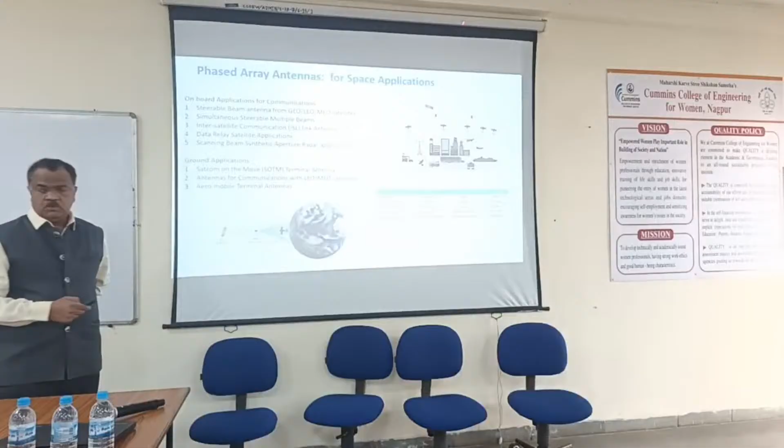Now the phase array antenna for space application, if you see, there are different domains, I just split into two. One is for the onboard application - when I say onboard, it means the antennas which are flying on the spacecraft satellites. And the other is the ground application, though it may be communicating with the satellite. One is for space-borne applications, that is an onboard application for communication - not necessarily communication, it can be navigation or remote sensing satellite also. The ground application is the one which is communicating with the various spacecraft.

Now, one of the antenna requirements is a steerable beam antenna from LEO and MEO satellites. What happens then, why do we need this kind of feature, having the steerability, having the reconfigurability?

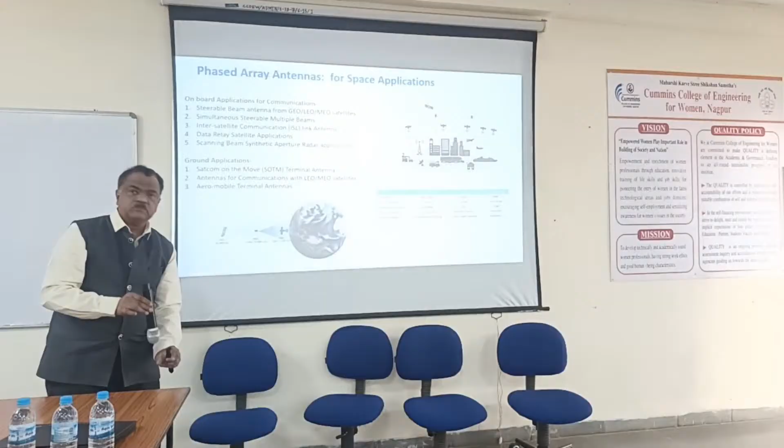If you see over the Earth, there are various kinds of orbital satellites. One is LEO, which is flying at a height of around 500 to 1200 kilometers. And if you see, their coverage is very small - just assume that suppose I have a torch, and I'm making its beam, the light, the field of view of the torch. You assume it is an antenna beam. If you put the torch like this, what will happen? If you put it very near to the ground, you will find a small circle. The moment you go up and up, the field of view increases. A similar thing happens here.

Similar thing happens with a satellite in the lower orbit, which has an altitude of 500 to 1200 kilometers - its coverage is small compared to the entire Earth. The moment you go to the medium Earth orbit satellite, which is 5,000 to 20,000 kilometers, its coverage is more. If you want to cover the entire globe with these satellites, you will be needing hundreds of satellites. With just a few tens of satellites, if we go with the geostationary Earth orbit, which is at the height of 36,000 kilometers from the Earth's surface, 3 satellites are enough to cover the entire globe.

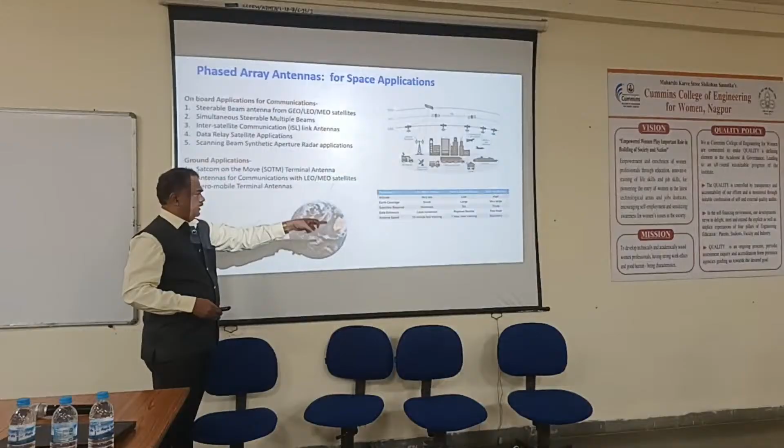Not only that, if we put 3 satellites at 120 degrees apart, they will cover the entire globe. Now their coverage is big - though the subtended angle is small, the coverage is big. So based on that, we see the various scenarios where we need this kind of phased array technology.

Now the question comes, where do we need this antenna?

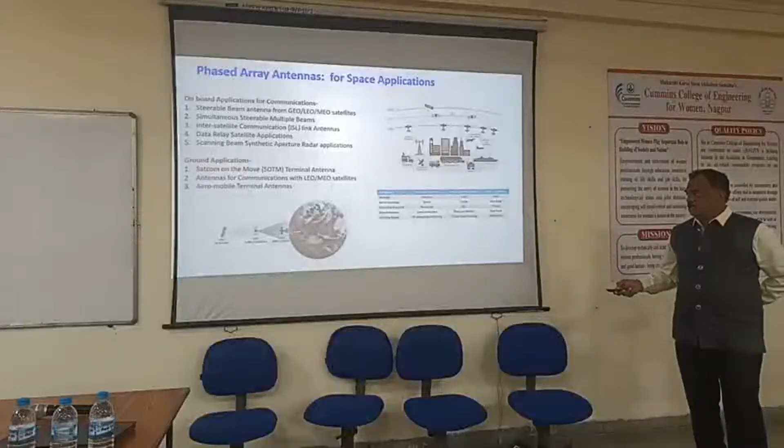Similarly for LEO and MEO, especially LEO, you might have heard of Starlink or OneWeb or other satellite constellations. Recently the Government of India gave permission to use the Starlink satellite constellation. They have an orbital period of 90 minutes to complete the globe, so they are very fast. Even for one satellite, the visibility from the ground will be only 10 to 15 minutes, so within that time the next satellite will come.

So you need very fast steerability of the satellite as well as the ground station antenna. For that you need steerable antennas, either for the ground antenna to track the LEO or MEO satellite, similarly for MEO as well.

Now similarly, there's the application of simultaneous steerable multiple beam generation. If I have spot beams, very high gain beams, and I have to cover a larger area, then I need simultaneous generation of multiple beams from either LEO or GEO. There also I need a steerable antenna, a phase array antenna.

Similarly, inter-satellite link communication, various LEO to MEO or LEO to GEO communication, shown here in different orbits. Suppose LEO is communicating and going within 10-15 minutes of the circle, then if there's already a call going on, there should not be call breakage. So it has to transfer the content to the GEO, and GEO to the next LEO coming into picture. There you need inter-satellite communication, satellite to satellite communication, and there also you need a steerable or phase array antenna.

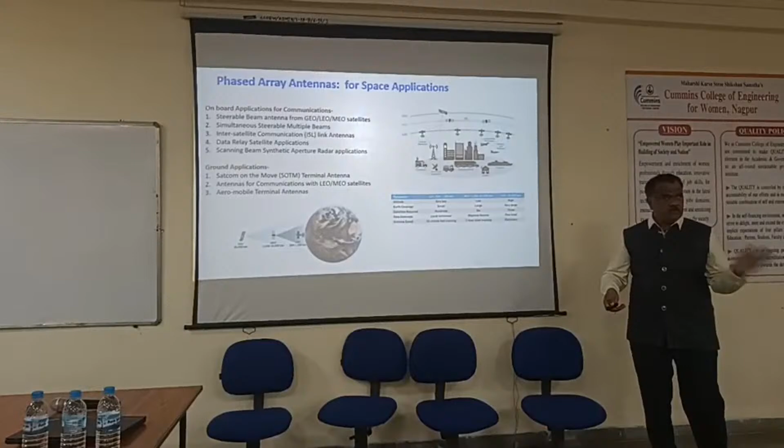Now again in the data relay application, the right example is our Gaganyaan, which is also moving in LEO constellation around 400 kilometers. For Gaganyaan to be continuously tracked and communicated with, we have put in satellites, currently two, called Indian Data Relay Satellites. Gaganyaan will communicate with the data relay satellite, because Gaganyaan will not always be visible from Indian soil, since it completes its orbit in just 90 minutes. It becomes very difficult to have visibility of a satellite going beyond the horizon, but the communication should not break.

So then it communicates via LEO to GEO, since GEO is always visible, and it communicates to the ground station. For that application also, we need a steerable or phase array antenna.

Then there's the scanning beam synthetic aperture radar antenna. This is one of the remote sensing satellites, a radar imaging satellite, mostly in LEO. We have to scan and take images, and especially in microwave remote sensing, we need a scanning beam antenna.

So these are the various applications where we essentially need phase array antennas or steerable beam antennas. Rather than saying exactly phase array, I will say steerable beam.

Now, how do you achieve the steerable beam antenna? There are various technologies available that will classify into different types of antennas.

Similarly, here I mentioned the SATCOM on the move. Even if you are communicating with the geo satellite, which is stable with respect to Earth's movement, if you are moving on a vehicle, say a train, car, or plane, then your azimuth and elevation angle to track the satellite changes, and you need continuously steerable tracking to the satellite. That is one of the best observed applications. For SATCOM on the move, phase array is essentially required.

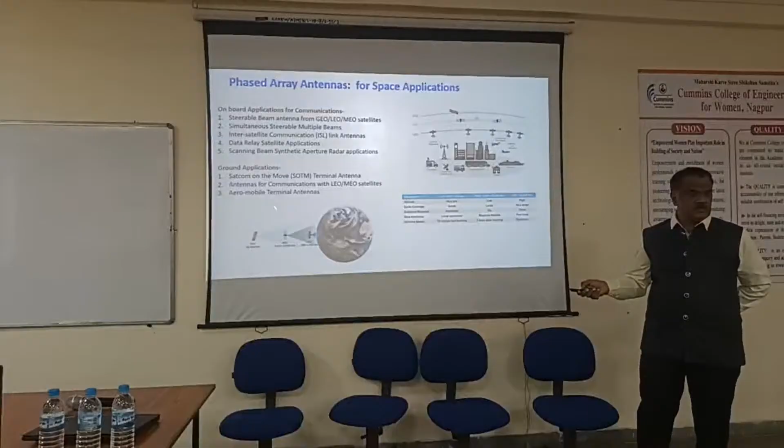Similarly, for LEO and MEO, as I mentioned earlier, it is essentially required because the satellite is moving fast. Aeromobile applications also, nowadays various aircraft are providing internet during flight, and they essentially need a phase array because they have to track mostly the geo satellite.

Can you go to the next page? Now we'll come to the topic of what is the phase array antenna. The phase array antenna per se is nothing different. It is not a tough concept, it's a very simple concept. It's a progressive phase at the input of the radiating elements.

I will show in the next slide. If these are the array elements, different array elements are there, and you have this kind of phase front, then the beam will come from there. If you change the phase front in a different direction, the beam will come from the direction perpendicular to that phase front. The concept is very simple.

Only thing is how you realize it, that's what makes the different technologies. There are various challenging technologies available to realize this. Simple concepts are also there, difficult concepts are also there.

So these are the progressive phase, that is the linear phase taper along the array of elements, that will generate your beam squint. You change the linear phase taper, you will get the beam squint.

So these are the, again, why phase arrays. The question becomes why phase array, because what happens when you can do it by mechanical steering also. When there is a large antenna size, what happens is the response time increases. For example, various radars on the ground, if you move by mechanical movement to track an incoming missile or anything, it becomes very difficult to cope up with the speed of the missile or the target. So essentially, what we need is electronic steering.

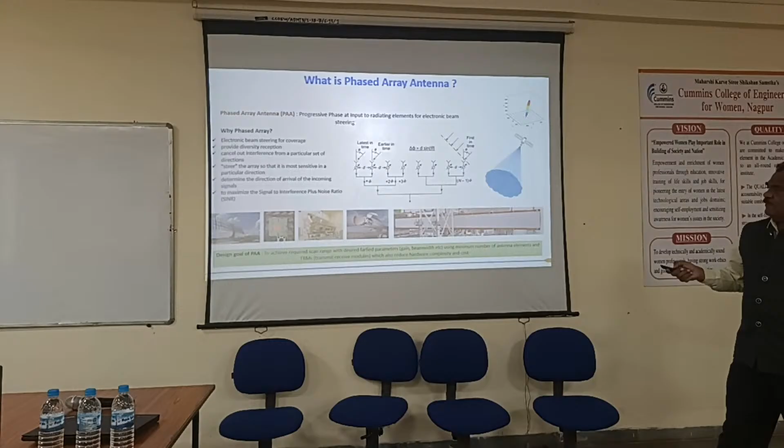In doing the earlier phase array, if you wanted to build a complete phase array, it used to require a completely big giant room. Not only room, it required a lot of volume because there was no miniaturization in the active circuits. Those were the days when phase array was a beyond-reach technology.

But nowadays, as we'll see in the course of the lecture, you can make one very easily in your college, sitting on your palmtop. So these are the advantages, and another advantage: it's not only diversity reception. Having the phase array gives you different control over the aperture.

You can realize what happens during different communication scenarios nowadays. There are various fixed frequency signals, various applications going on. If in a particular direction you are getting any interference, you can create a null in that direction so that it is not affecting your communication. Your communication direction can still link and work, and the interfering signal you can suppress by creating a null or suppressing the side lobe in that direction.

That's a big advantage of the phased array. It's not only steering, but along with steering you can create interference suppression in your beam pattern.

This is the steering of the beam, that is the standard application. Determine the direction of arrival - what happens many times is you don't know where to steer the beam, where the target is coming from, where the object is, so I have to steer the beam. The advantage of this phase array is that you have so much flexibility.

You can scan the region and determine your signal's direction of arrival. There are various methods for doing this direction of arrival estimation - you might have studied it, or perhaps taught it in your various courses. Various algorithms are available to detect from where the target is coming.

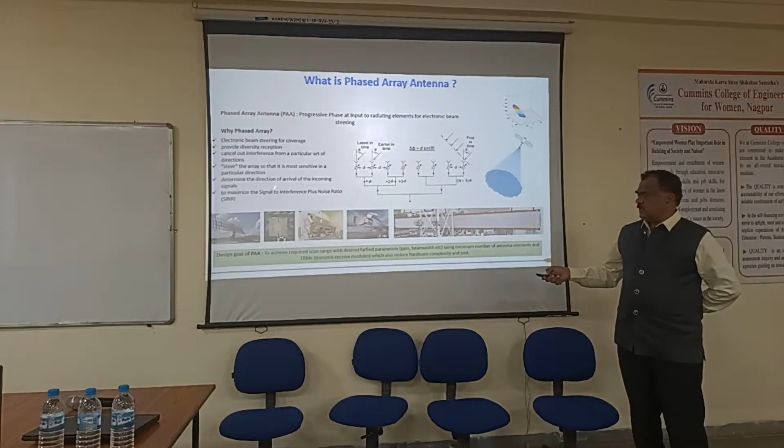This is another very important application need. This cannot be done mechanically only, so it has to have an electronically steered beam antenna, so that you can maximize the signal to interference plus noise ratio. This is again a manifestation of the same application.

Now, what is the design when we talk about phased arrays? What are the design goals? What is essentially required to consider when designing it? What is the scan range I'm looking for? How much - 0 to 60, 0 to 90, 0 to 10, 0 to 5? That depends - that's the first parameter you should have. What is the scan range?

Then, what kind of far field patterns are you looking for in terms of gain and beam width? If you need really high gain, that will be your starting goal and starting parameter for designing this. Then, use the minimum number of elements, because the more the number of elements increases, the more hardware and cost increases, and the entire thing becomes very complex. So those are the design goals for the starting point, and then accordingly the design proceeds.

Now this physics of basic beam steering - as I mentioned earlier, if we focus on this part, it is very simple. Let's take the case of the linear phased array. You can have uniform amplitude. Now you only have to change the phase taper.

This is the phase taper I am showing across this element, and this is the pattern I am showing across this element array. What happens is, the moment I change the beam - let's say from this direction it is steering - because the moment it shifts, the beam goes in a different direction. It's a simple concept: you change the phase taper, and you get the beam direction change. This is the simple principle on which the beam steering concept is based.

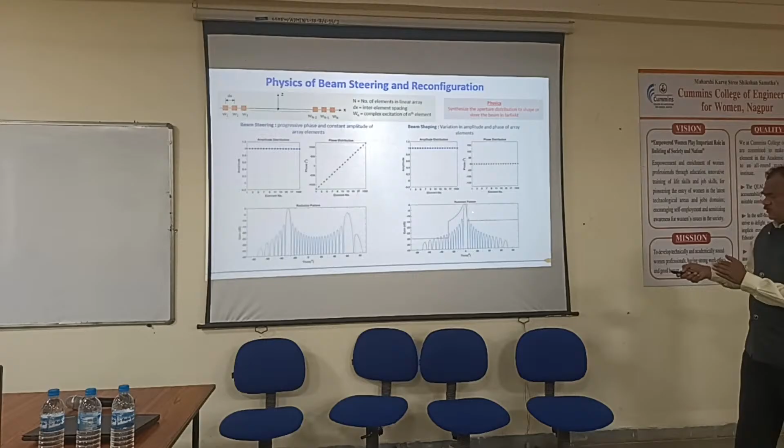Now if you see at this particular position, this pattern has become exactly like this - in the other plane it is simply a pencil beam. Now if somebody asks what is synthesized, how you synthesize it in simple terms - the antenna's far field is nothing but the Fourier transform of the aperture field distribution on the antenna.

If I want to arrive at this kind of final excitation coefficient in terms of amplitude and phase, I take this kind of far field pattern and take the inverse Fourier transform - then I should get the excitation coefficient close to this. Though it won't be exact, it will be a good starting point for the design, to get the initial excitation coefficient, and then you need further optimization.

The reason optimization is needed - why the inverse Fourier transform doesn't result in the exact pattern - is because of truncation of your aperture. As you see in the Fourier transform, infinite bands are there; if you truncate, the performance will change. Similarly here, you are truncating the size - your antenna aperture is not infinite, it has some finite dimension. So according to that, your exact inverse Fourier transform will not yield the desired result.

You need essentially optimization in both amplitude and phase to get this desired pattern. These are just a few examples I showed. There are various things you can do, like creating a null in a particular direction. For example, if you want further separation from a particular direction, you change not only the phase but also play with the amplitude, and you can create a null in that direction. So various types of radiation patterns can be generated.

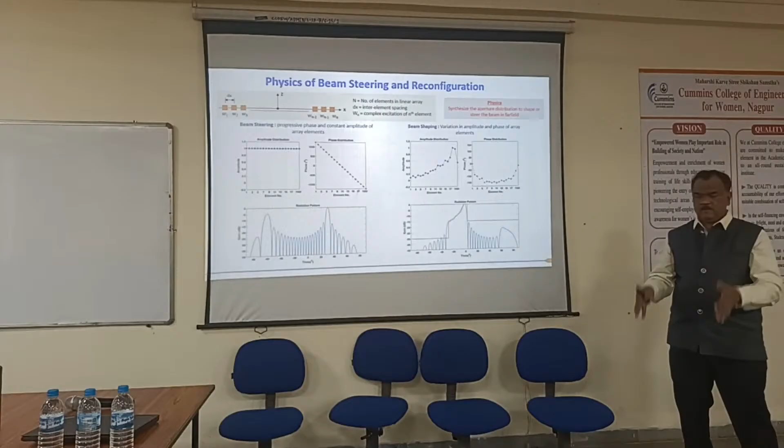For example, for our geostationary satellite, we had to generate a footprint literally like our geographical boundary, like India. There we used a shaped reflector because it was a fixed beam, but again the synthesis is a similar concept. The optimization is complex, but you get a footprint exactly fitting your geographical boundary. The power is not going beyond India; it's exactly concentrated only on our mainland region and islands.

Now, if we go to the phased array, what are the different types of phased array architecture? You can have passive, active, or hybrid. What do I mean by passive? As I mentioned, if it's a simple concept where I only want to steer the beam, I need essentially only the phase shifter, nothing else.

If I go with a passive array for the scanning beam, then I can use passive phase shifters. These passive phase shifters can be ferrite phase shifters, or various reflection type phase shifters. There are various ways of achieving these passive phase shifters.

Then what you need is to combine the power. You need essentially a beam forming network, like various power combiners depending on the number of elements, and once you combine them, you get a beam in a particular direction. Now, for radar, whether transmit or receive, you use a single transmit-receive module, and then subsequently the IF domain, receiver, or signal processor. This is the constant part.

But in the passive array, this will be the only element. The major part will be the phase shifter, which will steer the beam. What is essentially required is a high power amplifier or this...

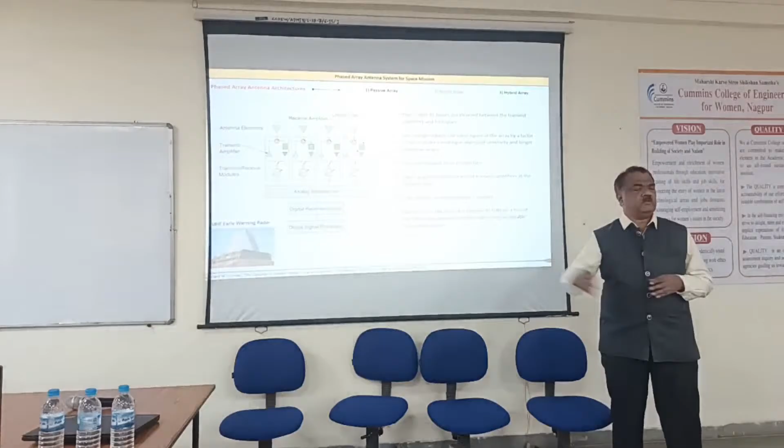Here, now the transmit amplifier, since it is 100, I don't need a 100 watt single, I will need a 1 watt amplifier as 100 numbers. Similarly, LNA will be 100 numbers.

The advantage I got, the phase shifter will anyhow be the same. The advantage is, if some of the elements fail, the entire array will not fail. It will be a graceful degradation. A 5 to 10% degradation if the elements fail of these active devices, the performance will have insignificant degradation. So you can still tolerate it and still communicate.

This is the major advantage, the graceful degradation of the whole phase array. Because the contribution of each is say 1 watt or 2 watt, even if 10 out of 100 one-watt amplifiers fail, it doesn't matter because you are hardly losing 10 watt power, but the remaining 90 is still available. So the entire phase array performance degradation is graceful.

This is very important, especially onboard, because there we cannot replace it. Once we have flown the satellite and it fails, one amplifier fails, then we cannot go and repair it. On ground we can do it, but onboard we cannot. So this is a very important parameter.

The graceful degradation is a very important trade-off while selecting the architecture, because the temperature it's exposed to can go from -60 to +70 or something. That kind of temperature range applies to the active devices, and despite passing stringent qualification criteria, there may be a workmanship error or a device error, and it may fail. So we have to have a tolerance to performance failure. This is why graceful degradation is a major advantage here.

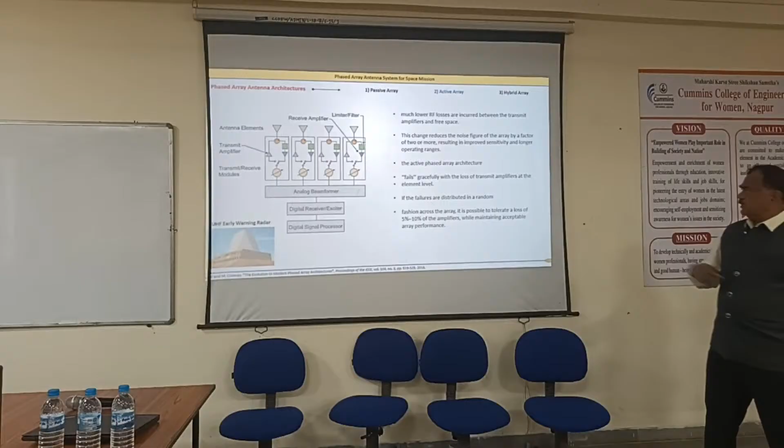So these are the different advantages and disadvantages of the different architectures. As I mentioned, earlier the active array antenna was very costly. Nowadays, because of the progress in 5G, 6G and mobile applications, since production is in the millions, the cost of various MMICs has reduced significantly, and the cost has reduced even for the active phase array.

Now the key parameters for specifying the active array: operating frequency and bandwidth, EIRP (effective radiated power), scan coverage, beam rate, side lobe levels, tracking accuracy, waveform parameters such as whether it's pulsed, duty cycle, and noise figure. These various parameters, some not necessarily specific to the antenna, are essentially part of the array because of the active devices - things like third order intercept, stability and phase noise, harmonic and spurious content, reliability, and prime power requirements. These are the various parameters you have to consider when designing the phase array.

Now, I probably will not go into detail since you might have studied antennas or taught this to your students - these are the basic array factors. When you have different elements in an M by N array with isotropic radiators, the array factor is the summation of all the individual fields. You get a very narrow beam, which we call the array factor, multiplied by the single element pattern if it is not isotropic and has some gain. If you multiply the single element gain with the array factor of the combined array, you get the entire radiation pattern of the full array. That is given in this equation.

Now I have shown another input. Many times I need a large gain. So if I go with individual elements, as shown earlier, and go for the TR module for each, my cost will be tremendous, enormous. That is okay when I trade off this.

If I really need a large scan angle, 45, 60 degrees or more, then I will go for individual elements with either active or TR modules each. But if I don't require that much large scan angle, then I will group some of the elements. But I still need a large gain, so to reduce the number and cost, I have to group elements.

Let's say I have done the grouping of elements, this much of a large array. If I use individual elements, it would need a large number of active modules, which I don't want. Let's say my scan angle is very small, less than 10 degrees. In case of GEO, that is good enough.

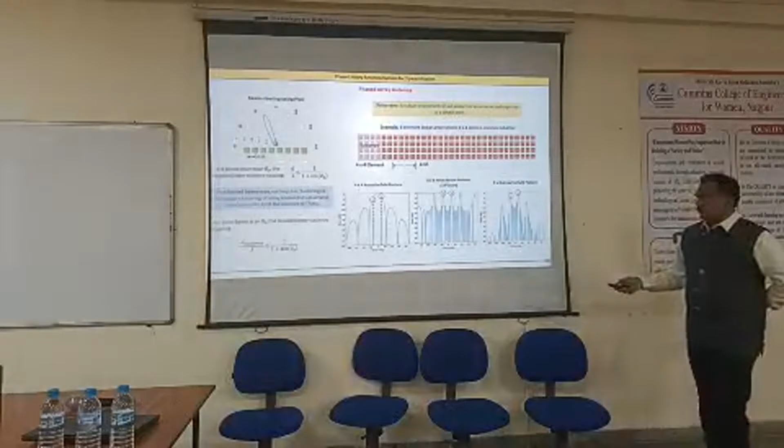So if this is taken, then the simple concept for having a grating lobe is: if D by lambda is less than 1 upon 1 plus sine of theta naught, your scan angle, then you can avoid the grating lobe. Now I will show what this kind of grating lobe looks like.

This is, let's say, a 4 by 4 array full pattern shown here in the normal case. But if I take the scan angle case, grating lobes appear, like here where I have scanned the beam using the subarray. Equal to the main lobe, there is another lobe called a grating lobe, which is also taking a significant amount of power. This is the disadvantage of having a subarray.

But if you are able to tolerate it, then I will not move beyond this much scan angle, I will keep a smaller scan angle because that was the requirement itself. Then I can tolerate this side lobe, this side lobe - this is called a grating lobe, and it will be governed by this criteria.

For subarray design, instead of single element spacing, you use subarray distance center to center. Then accordingly you select, for a given subarray distance, what is the maximum sin theta naught scan angle you can tolerate. This will reduce the grating lobe level, because grating lobes take a significant amount of power in the undesired direction, so by design you have to suppress it. This is essentially a tradeoff with reducing the number of elements, tolerable grating lobe level, governed by the scan angle.

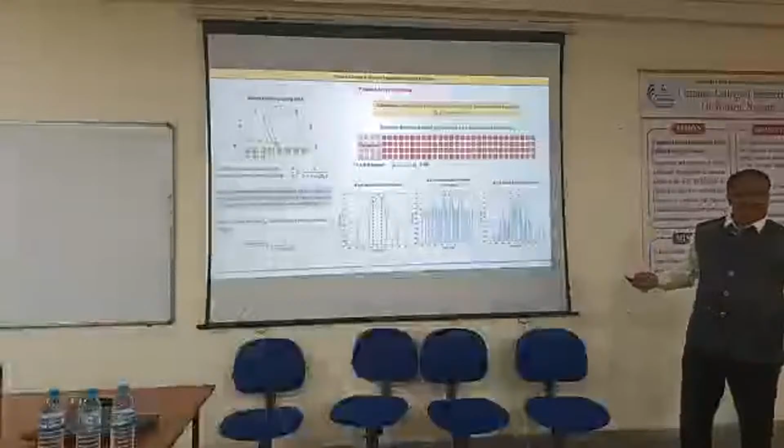Another parameter to consider while choosing the subarray is phase quantization. Let me go back to the previous slide.

Had it been a single element, each having its own phase shifter, I would have got the phase taper as shown in the earlier slide, giving a very good, nicely linear single line fitting y equal to mx. But what happens if I make a subarray? For this four element subarray, I get a constant phase, and again there will be a jump for the next four element array. This is the concept being shown here: when quantization comes for a subarray, say of four elements, there will be constant phase, then another constant phase for the next group, creating this kind of step.

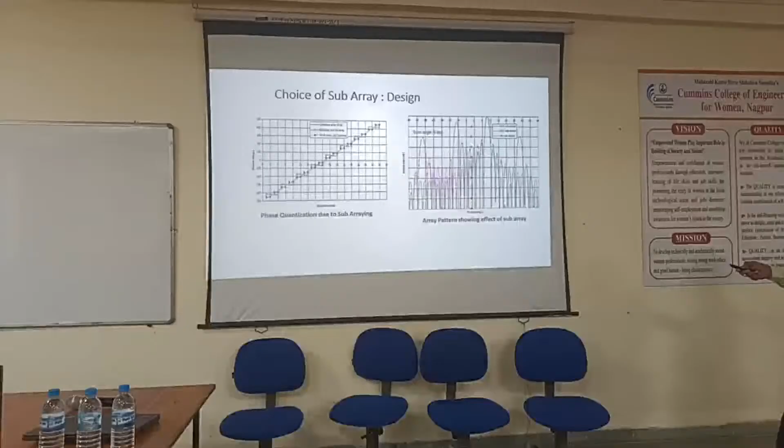This step performance appears on the aperture phase distribution, instead of the ideal spatial straight line you would have wanted. This staircase phase distribution generates quantization noise, which will also be seen in your radiation pattern. So you have to see how much of this you can tolerate, and again the tradeoff parameters are the same. Considering what is tolerable, you select accordingly and proceed with the design. These are the aspects you have to keep in mind while designing.

Another design consideration for phased arrays: suppose you take an odd number like 1:9, that's 9 elements. What happens when designing odd number power dividers? It becomes slightly tricky. That's why you choose a symmetric binary feeding network for the subarray to minimize dispersion. So if you have a good 1 to 2, 1 to 4, in the order of 2 raised to m, that becomes straightforward and easily good performance can be achieved.

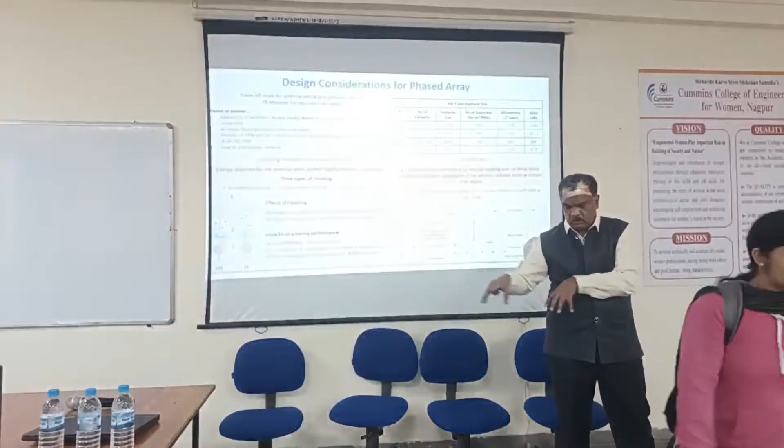So accordingly, the elements can be chosen. For modularization in the types, given the full array and subarray structure, I should select such that I can place things properly while modularizing, and accordingly select their power distribution. This aspect has to be kept in mind while designing the phased array. These are all practical concepts which are very important when you start designing the phased array and develop it, especially if someone asks you to.

Another important consideration is the choice of element spacing between elements. I showed the distance and how element to element spacing has an effect. The parameter it affects is the coupling between array elements.

The moment you scan the beam, what happens to the radiation pattern is radiative coupling between elements, and even surface currents, if present, cause mutual coupling. There are types of this coupling: it can be radiative, surface level, or feed network level. Surface level means if it's a patch array and you are scanning it, then along the dielectric substrate the feed is also going, causing surface level coupling. Feed network to network coupling, if present even in the feeding network, also causes performance degradation.

To what extent the performance can degrade, I am showing here. This phenomenon is called scan blindness.

If you have to scan a large scan angle, what happens? Let's say the dotted pattern shows the element pattern. If this element pattern behaves smoothly like a Gaussian beam with this kind of extent, there's no problem. But if coupling is the troubling parameter and is not properly designed or taken care of, this element pattern will not remain like this in the presence of other elements. Instead, it will create a null.

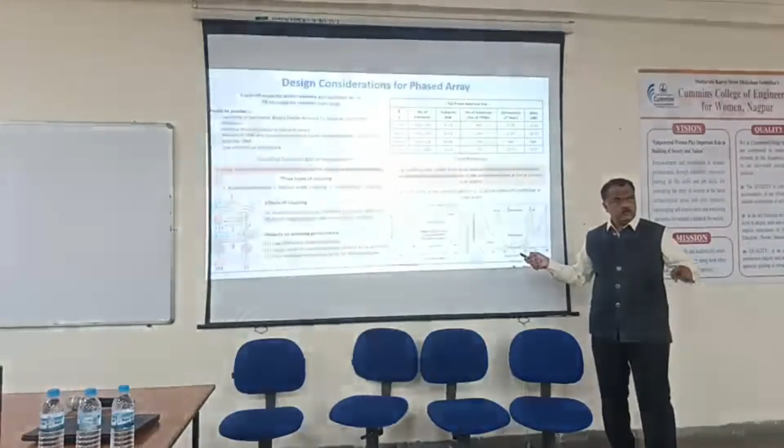Sir, can this analysis be done in specific software? Yes, this we can very well do in any full wave solver, either CST or HFSS, or various software which can handle 3D FEM or full wave solving methods. Any software, it can be HFSS, CST, or any specific software, and I can tell whether it has this capability or not.

There are many softwares that can take care of it, but you have to define and take care of it while designing. If you put an entire large array, sometimes you may find that your computational capacity is not large enough to solve the problem. This indeed will happen, so those things have to be taken care of.

If this happens, it's not only low efficiency—even if the problem is not that serious in extent, the efficiency will still be lower. That is another disadvantage if the coupling is poor. So mutual coupling in the phased array is one of the parameters that has to be seriously addressed while designing it.

Scan parameters are explained, along with the poor envelope correlation for MIMO systems. Again, a similar correlation factor arises when you have multiple elements, like in terrestrial communication where MIMO systems are used—this will have poor envelope correlation factor. These are the various problems we have to address while designing it.

Here I have shown some different types of lattice structures. It can be a rectangular lattice structure—how for different beams it will look while scanning, what are the number of elements, what are the scan losses. Sometimes even if it is a circular structure, you only select the circular aperture, but the lattice is still rectangular.

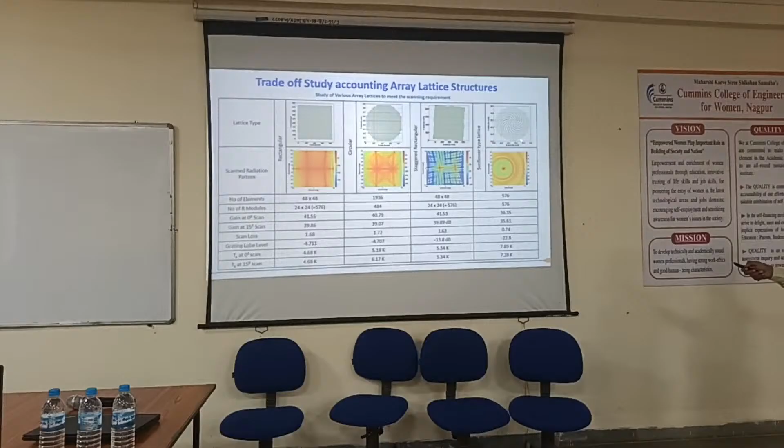This is a completely sparse array, or it is called an aperiodic array. The example I showed is the sunflower type of lattice—it is not regular, but at least has a regular structure, and it reduces the number of elements and cost. This kind of technology, not just the sunflower lattice but the aperiodic array, is becoming a topic of research—how to optimize it further using various methods, either AI or polynomial equations, to design and get the best performance over the entire scan range.

So this trade-off essentially has to be done a priori when you start designing your actual phased array. Can you go to the next slide, please?

Design considerations for phase shifters: there are various different types, analog or digital phase shifters. It can be either a continuous phase shifter or a discrete phase shifter. Various domains are available for this, either MEMS-based or MMIC-based phase shifters.

I think somebody has taken up the MMIC-based topic. Whether this topic has been covered by somebody? No, MMIC is taken by Asmita Rani.

Nowadays phase shifters are also realized as MMIC-based phase shifters using active devices. These can be very miniaturized structures, and if passive, it can be completely a ferrite or a diode-based device, or other possibilities also exist.

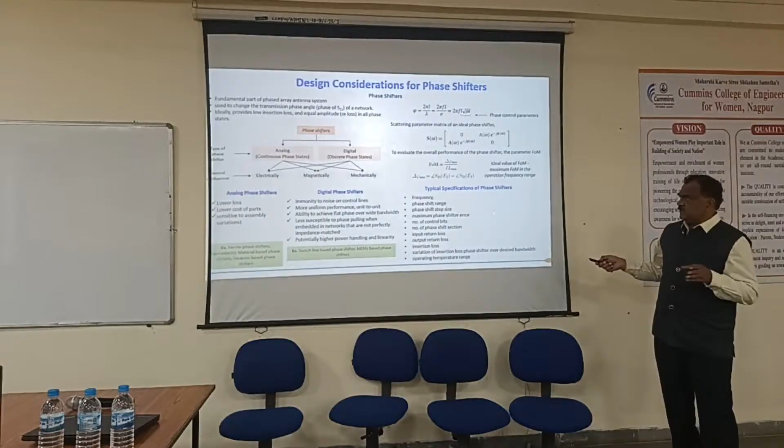That is the minimum phase shift you can achieve from the phase shifter, and this also introduces a quantization effect. Even with a single element, if you use, say, a 2-bit phase shifter, what quantization comes? 90 degrees—every 90 degrees, or only every 180 degrees it will give. So quantization is introduced not only by the sub-array but also by the type of phase shifter you use.

This effect we have already studied. This quantization affects not only the amplitude but also causes some beam pointing error. It's not as simple as it seems—it also causes dithering or wavering of the beam pointing. If the beam is really large and you need accuracy of 0.01 or 0.02 degrees, it matters a lot while designing and must be taken into account.

Here I have shown the various effects of quantization on the patterns. Ideally, if the beam is scanned from here to here, I should have gotten only these side lobes, since I've plotted the intensity. Ideally, I should have gotten this kind of three-dimensional pattern plotted in a two-dimensional UV plane.

But if we go back to the 2-bit phase shifter case—this is the worst case, normally we wouldn't use it, I've just exaggerated to show the effect—what happens then is plotted. I'm not only getting side lobes, but scan-related side lobes are raised in this direction too, and the pattern shape itself changes. These are the various pattern perturbations that happen depending on the number of bits chosen for the phase shifter.

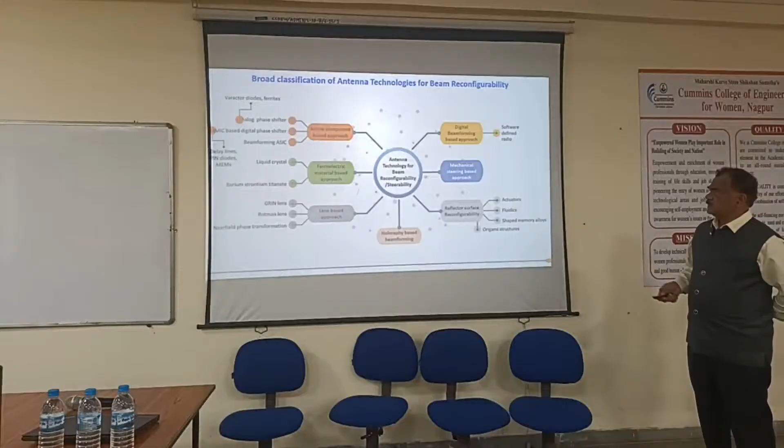Now, some antenna designs for SATCOM on the move terminals. If we see the current available technology and applications, what are the challenges? Multiple beam operation - what happens, especially why this technology is required for LEO.

Let's say you are at Nagpur and you want to use Starlink communication. As I mentioned, LEO satellites move within 10 to 15 minutes from horizon to horizon. Let's say you have tracked one satellite right now and started communication, which is coming from the horizon, and I continuously track the satellite. But the moment this goes to the other side, another satellite is coming by that time. If I miss this, there will be a breakage in the communication - I have to come back again. To avoid this kind of thing, simultaneously two beams are essentially required to track this.

What happens if I generate two beams? Either it's a conventional approach with two reflectors - one for one satellite, and on the ground also they use a two antenna approach: one mechanically steering for one satellite, the other for another satellite which is rising, while one is setting towards the horizon.

So in order to have a single antenna system, digital beamforming or some other approach, as I mentioned, can generate simultaneously multiple beams from a single aperture, which can be steered independently. This is essentially very much required for SATCOM on the move, for communicating and tracking with low Earth orbit satellites, or even various radars.

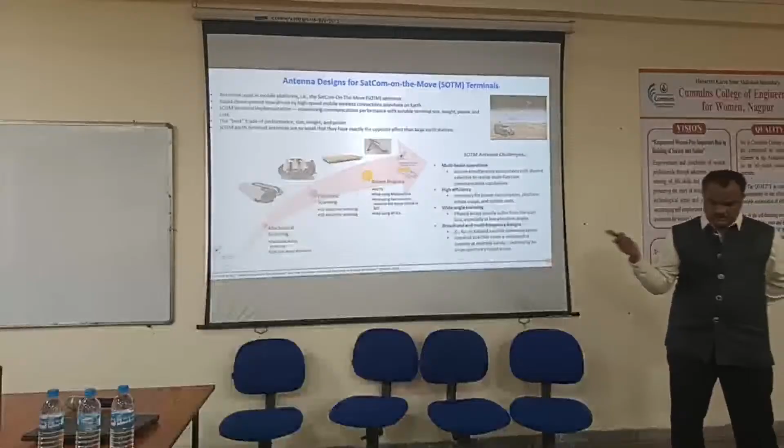The defense radar, or even when we launch a satellite or rocket, it splits and huge objects fall into the sea or ocean. We have to track those orbits, so we need a multiple object tracking radar. There also we need that technology.

So these are the applications where simultaneously steerable multiple beams are essentially required, which is very effectively possible in the digital beamforming approach. That is still an area requiring a lot of work, miniaturization, and cost reduction in terms of IC development.

So currently the most popular systems are mechanical steering, which still get the business largely because it's relatively low cost. Now if I suppose we go to the aircraft, the dome size has to reduce.

One approach is breaking the array. I will show some slides probably available in my presentation. That concept uses 1D scanning. Another is the phased array approach I showed. These are the things still going on, and various applications for SATCOM on the move are being done.

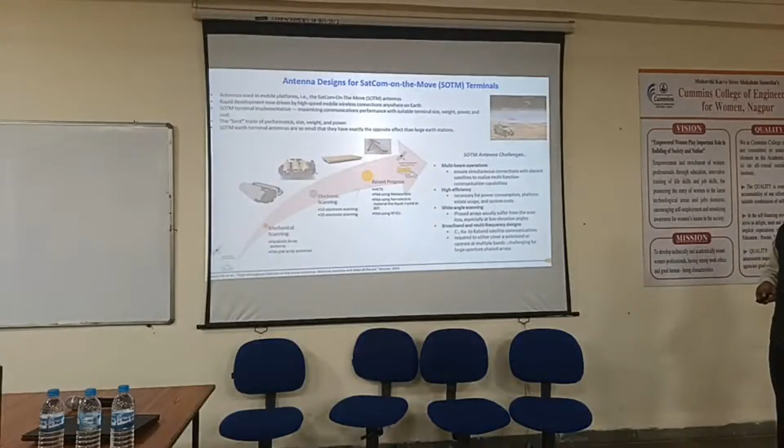So this sub-array based approach, for now I've shown some practical examples of things which are done, some of which we have done, I'll be showing it. Wherever I refer to some cases, I will note in the footnote which paper I have referenced or which company developed this.

So these are, of course, the simple sub-array - what elements are there in this. The concept here is that with a small array size, I can afford, for lower scan angle, to use a larger subarray as I mentioned. And when the requirement was small, we used this approach.

A sub-array based approach with a lesser number, let's say even 3 by 3 subarrays, configured with a microstrip patch element as the radiating element. We could do this over a large bandwidth and achieve a wide frequency band of 10.5 to 12.5, with a scan angle less than around 10 or 15 degrees.

So this is the radiating patch. Again, there will be a stacked patch to improve the bandwidth. This is one approach that is very much used to enhance the bandwidth. Some people have designed it this way. These layers, different layers put into that, increase the bandwidth and increase the coupling.

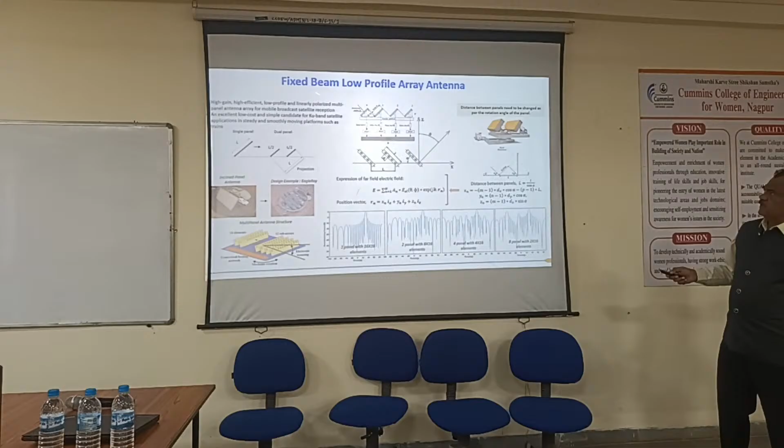This is the concept I was showing, where if suppose I wanted a full array - assume these are 8 elements, 24 on this side, let's say this is a 12 subarray - then I would have got this much height of the array.

Then if you put it on the aircraft or anything, you would have needed this kind of height to have a complete dome set. But in order to avoid that, what you do is split that, break it into 12 linear arrays. Now this concept is the same.

Here, if you say I have broken this into these different layers, what happens is that each radiation path is not blocked. Each radiation path is not blocked - it is still getting through.

So now you have to play with the distance such that for different scan angles, you have to change the design, adjust the phase, so that in the final phase front, they will all come in phase. That is essentially required. So this concept is only to reduce the height, but it introduces complexity in terms of design to achieve this in a different way. Forget the mathematics and timing, but it has reduced the volume, which was the practical constraint for designing it.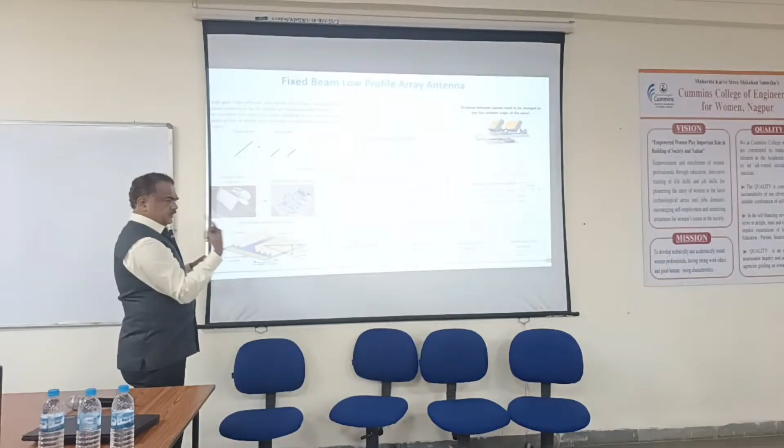But what I lose, I will not get the electronical beam in the azimuth plane. I will use the mechanical rotation in the azimuth plane and do it. So it is not causing my volume to change.

Had it been this entire elevation-wise, I have to rotate this way, then it requires a larger height, larger volume. So those are the practical design constraints, practical challenges, and such kind of constraints are only giving the need of finding a different solution. And that is why this kind of solution comes into the picture.

And now you have sacrificed, you have reduced the height by combining both mechanical scanning and electronic scanning. You have reduced the cost by having only 12 subarray active modules. Can you go next?

This one linear sub array we use is around 1 meter type. There are 24 in this direction, and then there are 12 such types. So there are 288 modules. The radiation patch, microstrip patch, if you see, was also unique at the time, giving very good bandwidth and very good efficiency, having both polarizations, horizontal as well as vertical.

Having one by EM coupling, other by aperture coupling. That way this coupling was achieved. I'm not going much detail into that.

So we can have the full bandwidth in single radiating aperture. We can achieve both the polarization and over a wide beam.

Then these are the various modes of radar shown, whether in the strip map mode or the scan mode. These are the various paths of the satellite, showing where we need scanning of beams for different modes of operation.

Sometimes what we do here in the radar, we have a spot beam, then we will use the entire array for generating the beam. If I need a larger swath, larger coverage, larger image, I have to replace - then I don't need the mount, I have to use the smaller size.

Then it is commandable from the ground - we use the smaller size of the array, and then we'll get the wider beam and wider swath of the beam. So these are the various ways it's achieved.

This is about one of the really unique examples - a 6 by 2 meter antenna radiating active phase array which we are using in one of the satellites. This is the satellite which is put in testing in the compact antenna test range, shown during the photograph.

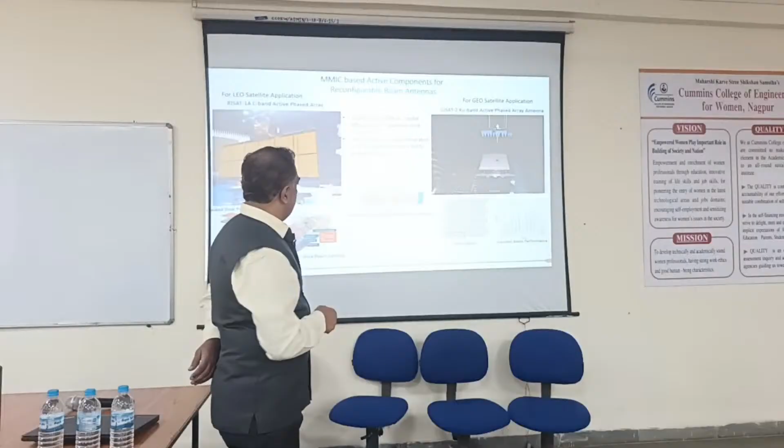Here, in one direction, in one plane, scanning was not required, so I used the linear array as a sub-array. But I needed nearly 588 modules. Here I needed only 64 modules, but gain was also very high. But the scan angle was also less in this case, or more in that case, because this is from geo satellite.

So this is one of the phased arrays which has already been grown, and it will be going in again in the next 2 months. These are photographs of various different stages - this is the backside electronics, the electronics of the TR module. These are the block elements shown here: SSPA, driver, and antenna elements. This is tile by tile, or panel by panel, shown - their specification we're not going into detail.

Yeah, another future steerable antenna - because mass is also important for onboard satellite antenna mass. This is not developed by us, I just put it in, but this is the technology that is required and still not so mature, not even worldwide. But it is essentially required.

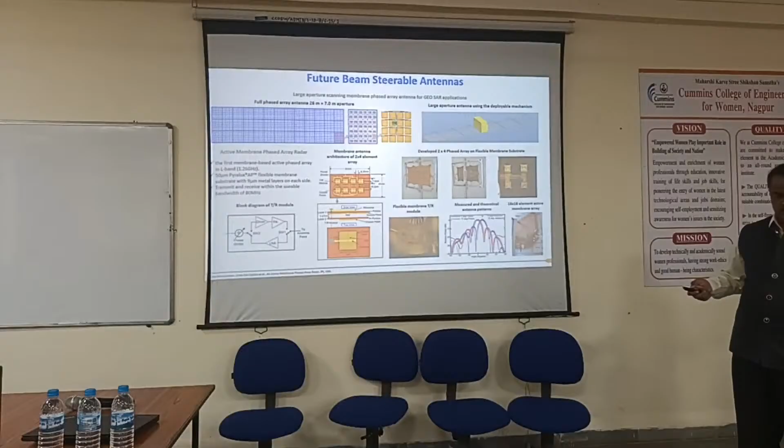What happens if you go with a solid patch array or solid disk substrate? The mass becomes significant. What we need is a membrane base. You see, this is a single membrane base - only the patch is printed on the membrane, and the membrane is really thin, on the order of 100 microns or so. The electronics are also integrated on the back side of it.

So the technology, not in terms of the antenna design but in terms of the process, various processes are required to be developed here. Those essentially become the technological element. So as I mentioned, how you achieve it, how you do it, what processes are involved - that makes the crux of the different ways of achieving this phased array.

So this is a membrane-based steerable antenna for geostationary application. We have developed one membrane antenna for our Venus application, and we'll show one photograph at the end. I will show it - let's move on.

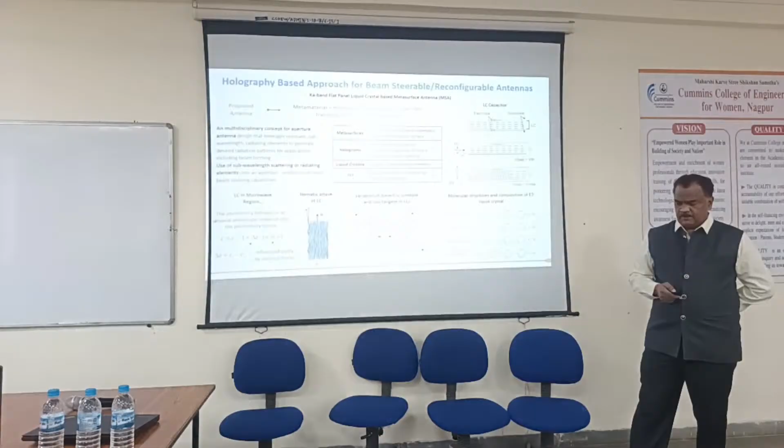Now another concept - I'll mention one classification - was a holography-based approach, used for beam steerable or beam reconfigurable or beam shaping applications. The concept here is like our desktop LCD panel - if you change something in that LCD panel, there is literally liquid filled between two glasses, which plays the role in the LCD panel of a PC display. It plays only with the optical domain.

But in the microwave domain we have done this, and that was really innovative - one of the things where we have used this holography concept in the microwave domain and achieved beam reconfigurability. Here's what happens - the concept is simple. There are two substrates with two electrodes, and these electrodes are controlled by thin film transistors that we printed in the nano-flexible electronics center - very small transistors. The moment you apply voltage, the liquid crystals become oriented in a unidirectional way.

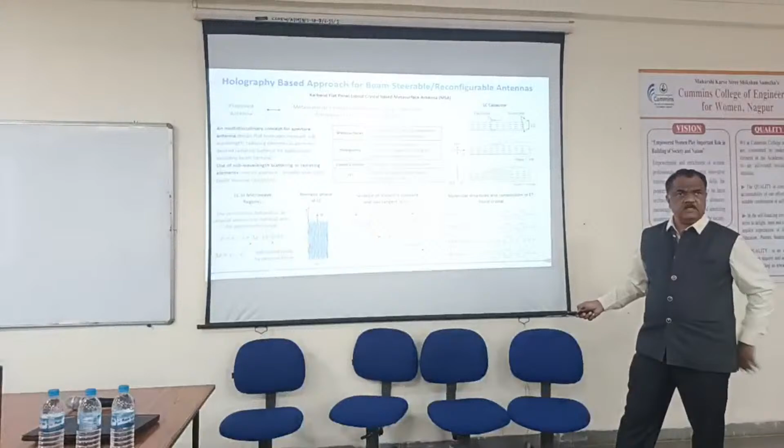This effectively changes the dielectric constant. Capacitance is nothing but this in the macro domain - if you change epsilon, it effectively changes the capacitance, and the phase shifter, as I mentioned earlier, when you play with epsilon you are able to achieve the phase shift. I'm not going into detail, but if you change epsilon here, using the anisotropic property of this liquid crystal, and apply voltage differently, you're able to change the capacitance - and effectively changing capacitance means you're able to change the phase shift, and you're able to achieve steering or beam configurability.

The major element - various techniques are there. Metasurface is a synthesis-based technique. Holograms are essentially required, liquid crystals and thin film transistors are essentially required - these things are able to achieve it. If you can fabricate it, this will really be a game changer.

Now this holography approach is a simple concept - it's the optics concept from physics that you have studied. If you have two waves, one is an object wave and one is a reference wave, and if you make this object wave and reference wave in such a way that the desired hologram is formed, then you can generate a beam in a particular direction - you can steer the beam in that direction.

For example, I've shown here how this reference wave is generated - in a simple patch arrangement where the different radiating elements are not macroscopic patches, but complementary metamaterial elements. These are basically electric resonator patterns printed into the waveguide structure - it can be a rectangular waveguide or a surface waveguide.

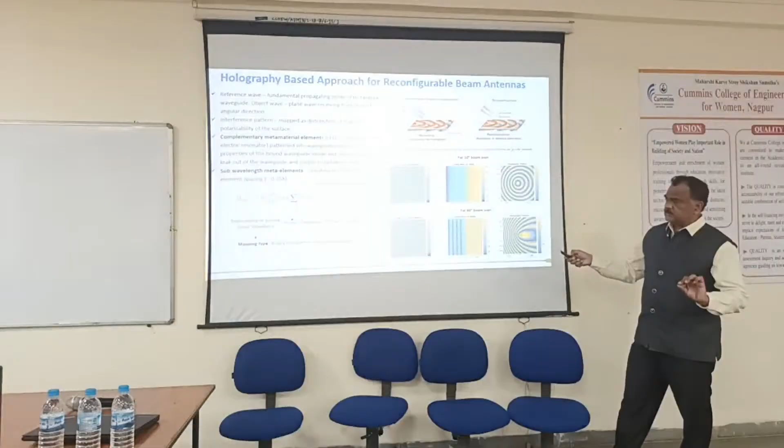I've shown here a surface waveguide with a single point feeding technique. Spherical waves are generated in the dielectric substrate, creating circular spherical waves in this dielectric slab. For a particular direction, if you need a 10 degree beam scan, the hologram phase for the incident wave at 10 degrees will look like this. If you generate the interference hologram pattern by adding these two waves, you get this pattern. So instead of the original circular pattern, for example a 60-degree beam scan, the interference pattern will look different from the basic circle. This is essentially the aperture field distribution on your radiating aperture, and you're able to generate, steer, reconfigure, or shape the beam however you want. This can be generated within liquid crystal or other various techniques available.

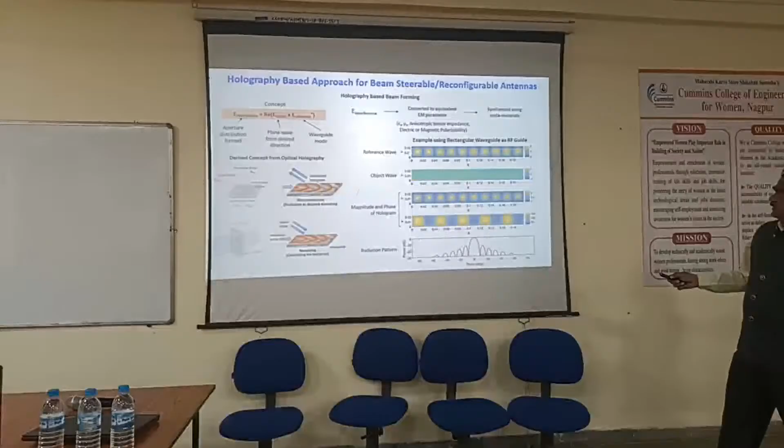Again, the hologram based approach. Here I've shown the simple example I mentioned earlier: the plane wave, object wave, and reference wave. Let's say this is the reference wave, and the object wave is coming from a different direction. This is how a hologram can be generated in the waves, and accordingly how the radiation pattern gets scanned. This is the simulation I've shown here, applying the concept of the holography based approach for beam steering. Now effectively I don't need a phase shifter or any other element to be added. By the geometry itself, I'm able to generate a hologram and scan the beam.

These are, of course, the design of meta elements. I won't go into detail, but the simple flow is: there are no direct design techniques available in the literature, so we have to work through a lot of mathematics and arrive at our own tools. First is simulation of the unit cell, called the electric resonator or complementary electric LC resonator (CELC). Then extraction of its S parameters from tools like HFSS or CST, using our own MATLAB code. Then computation of polarizability from the S parameter matrix, applying the Lorentz constrained hologram, and finally fitting it into the hologram distribution and computing it. No single software does this entirely; we have to build our own tool to synthesize and design this. But the result is really amazing.

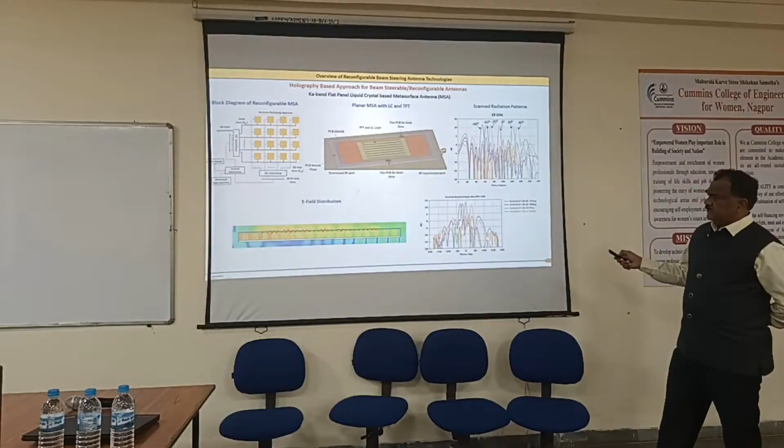This is E-field distribution I have shown, and these are some of the major performances of the realized gain of the liquid crystal based metasurface antenna. This is a really unique way of finding a pattern on that part.

Yeah, these are the actually developed hardware. It's just a thickness of 2 mm or 2.3 mm, and this is completely the lines, not wires. These are just simple few micron, 100 micron thick bus structures, able to control this entire large number of elements and reconfigure them.

This is one very good technology that has come out. Worldwide, I think there is only one company, Kymeta, which is able to produce this commercial antenna. It's really a marvelous piece. We have just developed a few prototypes because what we are lacking is the fab facilities.

These fab facilities are essentially required, like whatever is used to fabricate large TVs or panels. Such kind of facilities are required, and in India such things are not being fabricated. We have only at IIT Kanpur one small manufactured electronics facility, able to handle only 100 by 100 or 150 by 150 wafers. With that, we developed this concept and developed this antenna.

It was really a very good technology in terms of having the phased array or steerable array without using any extra array. This will be very cost effective.

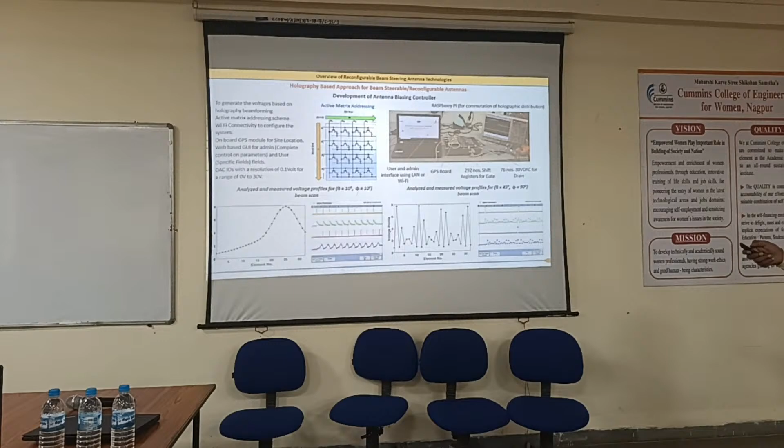Because what I showed you, that is the... if I go to the previous slide, just one more previous. We completely failed for one year achieving this thickness of 50 to 100 microns uniformly over the side. What happened is that, though conceptually we thought it was very simple—okay, I will put small spheres, mix it in liquid, and I will be able to get this uniform thickness of 50 to 100 microns over the entire surface.

But it didn't work. What happened is that the moment this liquid is sealed, there will be some pocket formed.

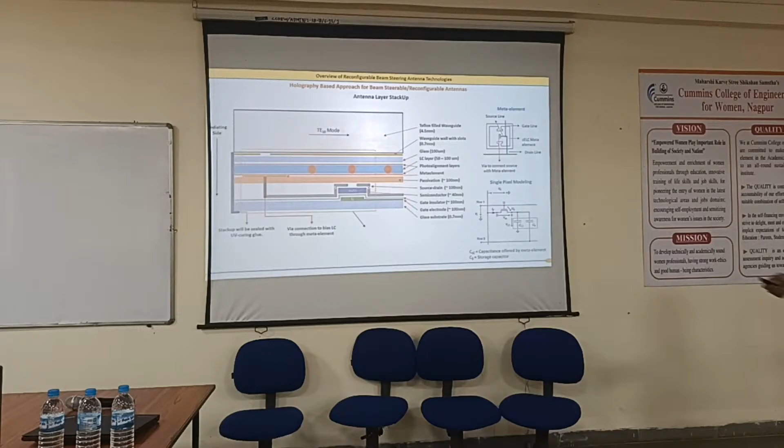A different setup is required to be established for that part. And then once we get it up, we have to do probing to check whether it is really giving the intended aperture or intended variability. All these things are required to be essentially done.

As I mentioned, I still hold that 20% is your design on simulation, but 80% is development efforts, which are very much essential for the success of any of this state-of-the-art technology.

Okay, here I have just shown the procedure. Maybe I'm giving you the slide, you can read it. These are the various ways of doing it.

In the designing, designing also is not straightforward. No paper will give a single design on how to design it. You have to have your own software, you have to use multiple software.

Even neither HFSS nor CST will give the entire design. You have to extract the parameters from solving it in HFSS, extract it, put it into MATLAB calculation, again use it, again feed it back to the software. These kinds of things are essentially required in the process, and then only you will be able to design it.

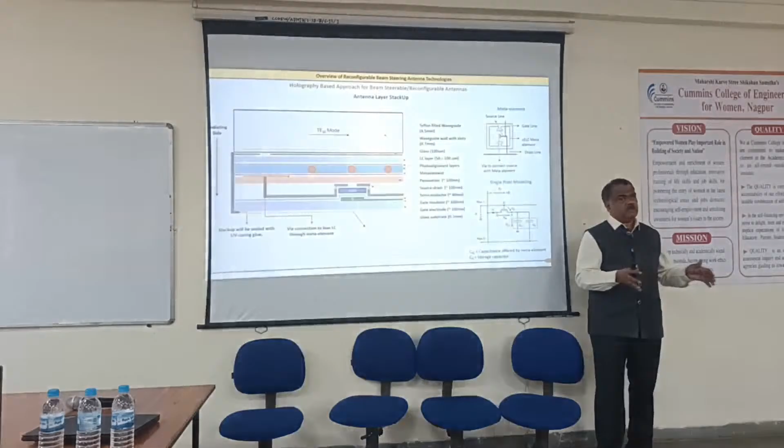So what we have gone into is that since I have to generate a hologram, I need small pixelization. The size of the element, when I'm saying sub-wavelength, means wavelength is divided into multiple pieces—it is of the order of 0.2 lambda. Meaning in 1 lambda there are 4 or 5 elements. That's why I'm calling it sub-wavelength. The size of this element is sub-wavelength, 0.2 lambda or even less, around that—approximately you can take it as 0.2 lambda.

Sub-wavelength. But now what happens—suppose, let's say, can we go back to the previous slide, the next slide. Yeah. Now if I do this, I have to generate the entire hologram.

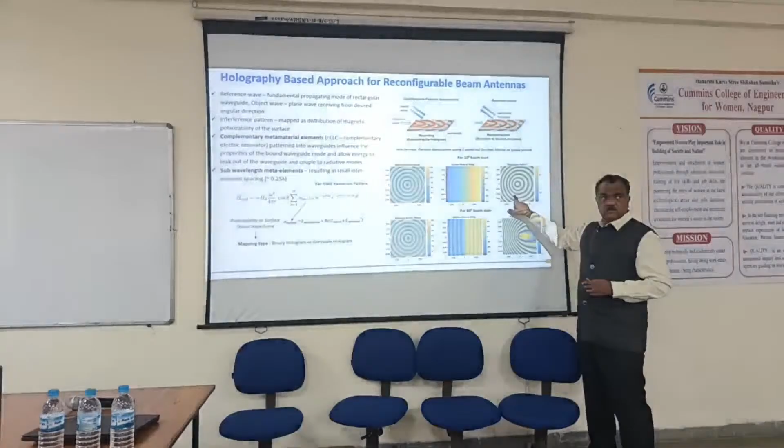Yeah, this was the hologram. The concept was based on this, whatever antenna I'm showing. I have to generate, let's say, scanning—let's say I'm generating a fixed beam, when I need this kind of pattern to be generated. If I take the element coarse, there will be large quantization. I have to have really small pixelization over the entire aperture.

So that is why we are using a small size, the bare minimum possible which still radiates. This is called the CELC element design, that is complementary electric LC resonator. Those are designed and placed in such a way that whatever radio hologram we require, we can quantize or discretize it into very small sizes. Then only a very good hologram will be represented by the actual element, and then the pattern will come. If I have lambda by 2 size elements, the hologram will still be possible, but the element discretization is so coarse that I will not get the pattern as desired.

Since, as you've seen with pictures, for screen resolution you say I need 4K or something to get very good quality—similarly here, unless I have a very small pixel size of the radiating element, I cannot capture the electric field into the aperture. That is why I need sub-wavelength size radiating elements.

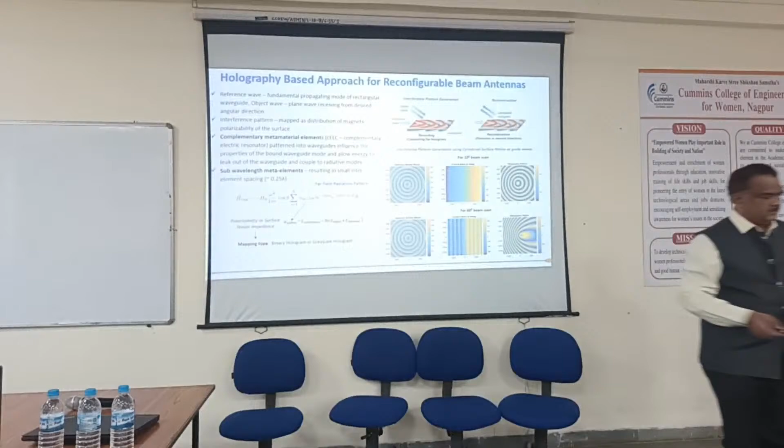This way, two radiating apertures were generated, and we got very good high gain, 32.9 dBi. If I want this much gain with a single fixed static patch array antenna, even with a microstrip patch array, my efficiency will be less than 30%—and I'm saying 30% very conservatively, it will be less, because the number of elements will be very large. If it's roughly 30 lambda by 30 lambda size, there will be more than 2000 elements, and the feeding network, if you imagine, will be too lossy and efficiency will suffer, unless you make it a waveguide feeding network, which will be bulky. But in this concept, I'm just using a single feed as a coaxial connector.

If you have seen at this point, it is generating a spherical wave, and the hologram pattern is designed in such a way that we are able to get a very nice Gaussian beam with high gain and high efficiency. This is very good, very cost effective.

Compared to this technology, cost is a driving factor many times. So I will compare this with the mechanical scanning antenna. People will prefer this over phased arrays because there is no cost involved in it.

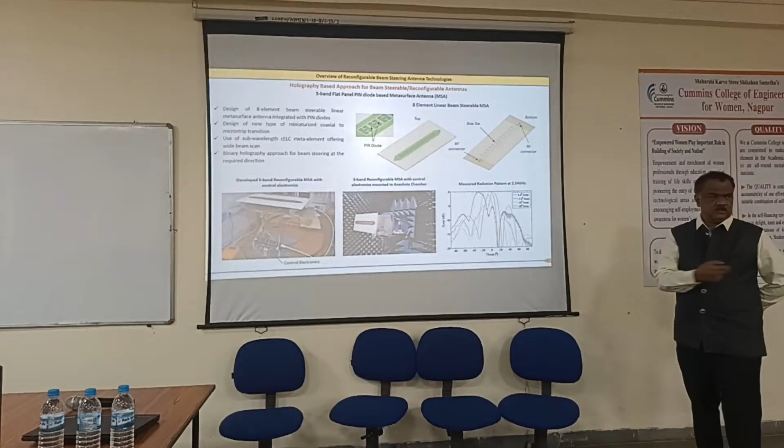Another application is for our future scatterometer payload. The current scatterometer payload is basically a scanning beam. This payload, on a satellite called ScatSat or OceanSat, gets ocean winds, and the application of this satellite is to find out the genesis of cyclones.

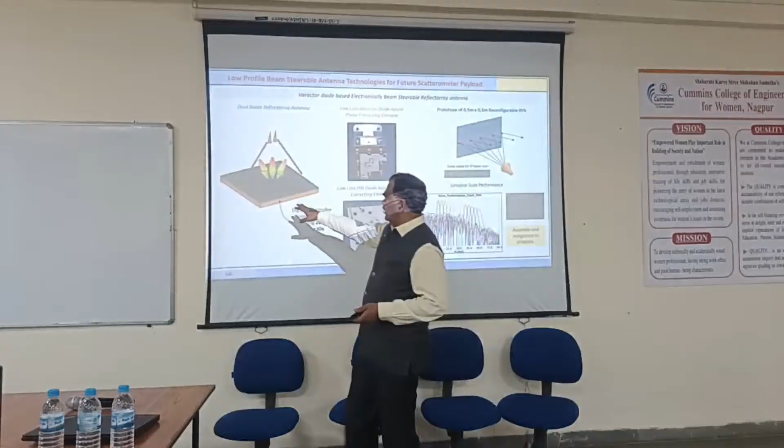Instead of a curved parabola, we made it flat. This is a flat dielectric substrate, 1mm or 1.5mm thick, shown here with a backup structure. The patches printed on this area are designed such that they compensate for the curvature and make the phase front planar, a plane wave front, like what the parabolic reflector property does.

Now this is for a static one. What we did is put a varactor diode there - let's say this is a single element, with the varactor diode and stuff. Then we change the voltage of the varactor diode, varying it changes its capacitance, the property of the varactor, and you are able to change the phase on this aperture.

Again, with the same setup, we are able to scan the beam, as shown in the scan plot. Of course, at large scan angles there is a gain drop. Since we wanted to cover up to this range, we are able to absorb this. It's not as ideal as mechanical scanning where there is no scan loss, but here it serves the purpose, giving simple scanning.

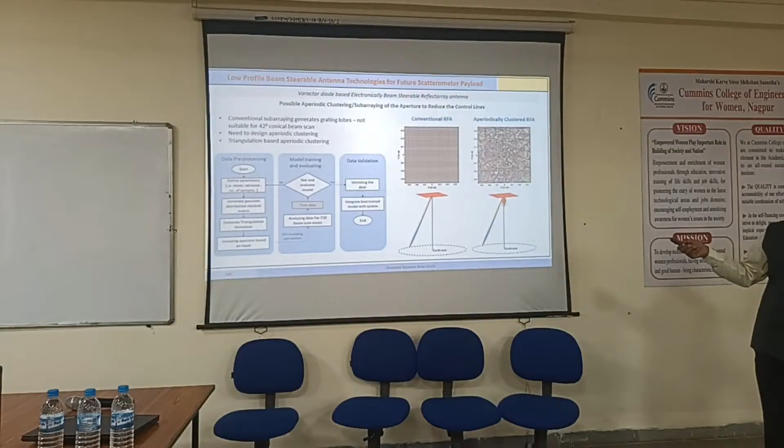Yeah, these are just the previous examples I showed, as I mentioned. These are now MMIC based or ASIC based, application specific ICs. Earlier, in the array set photograph shown, whether it was a radar imaging satellite or GSAT, these TR modules were not there. There were MMICs, but they were packaged in some big box package. Though it was LTCC at that time, it was still cutting edge.

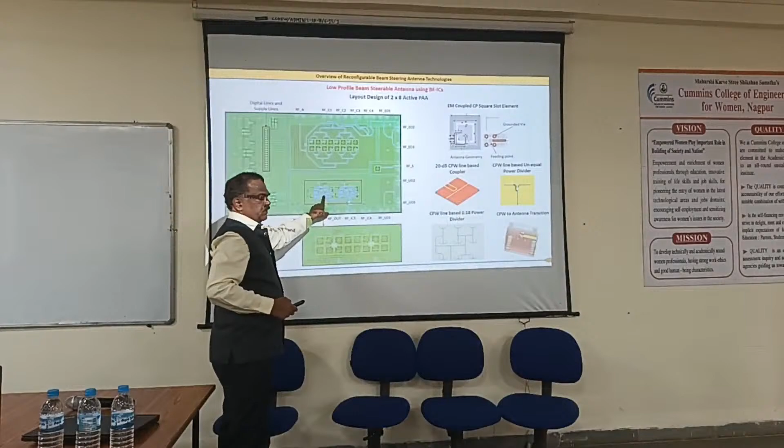If these line layouts are not properly designed, the power gets coupled between these two or multiple ports, and then it is fed back to another channel, because this IC per se has 8 channels. What happens then? Whatever power is coupled goes back to another input of another channel and gets magnified, and then it becomes oscillations. With that oscillation, it was taking away power, and the gain was reduced, and effectively our G by T got reduced by 3 dB, because the oscillation frequency was out of band, like 2 or 3 gigahertz out of band, and there we were getting the signals. It was taking the undesired band, so our desired power was going into that region, and we got less gain.

It took a lot of time to diagnose, because the entire structure in simulation is highly difficult. We had to just apply the concept where we had gone wrong. After rigorous brainstorming, we found out this could probably be the reason, we attacked it and overcame it. So then subsequently we could develop the next hardware and resolve the problem. What I'm trying to say is, in the development cycle, we have to really test the concept, the practical approach, the theoretical concept, and the possibilities of failure. Those things are essentially required to address while designing. Those are very important to make the product or hardware successful.

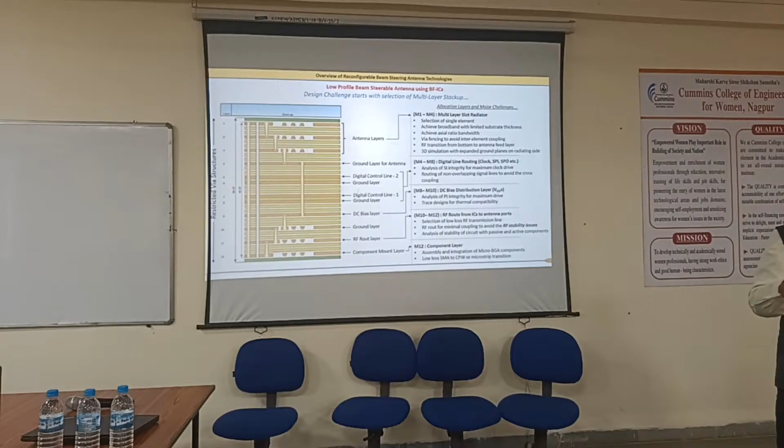Then we purposely redesigned the layout such that we got 45 to 50 dB coupling between the CPW line to CPW line of different ports, by moving them further apart, and also checking the length of those lines to see whether they are resonant at that wavelength. If that resonance is present, it itself will couple power into that path. So we isolated these aspects one by one, increased the coupling to 45 to 50 dB, and then even with 25-30 dB of active gain, it did not cause a problem. We kept the eigenmodes away from that, and subsequently there were no oscillations.

Another aspect I mentioned is that stability analysis also needs to be done, which we had missed in our design flow chart, and we have now made it a mandatory part. After doing that, whether the entire structure is stable or oscillating also requires special analysis - HFSS or CST alone will not solve it. We have to do additional analysis separately. After addressing all these areas where it can fail, we solved them one by one at the design level, fabricated it, and then it worked correctly.

Again, part of the analysis is to see whether the signal is integrated, because in the mixed signal cards, what is essentially required is to check that digital signals and microwave signals, if they're coupled, can create havoc. Those things have to be taken care of by performing rigorous signal integrity analysis.

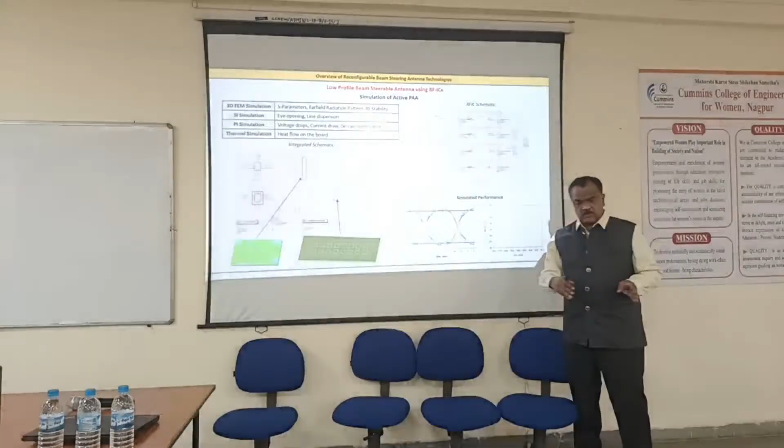We check whether the clock is cycled properly, because otherwise, if the clock gives more performance than what the channel you selected or the state of phase shifter given requires, it will not activate that state, it will activate some other state, and you will get a different phase. Instead of pointing here, it will point there. So this kind of signal integrity analysis, especially in the mixed signal board where it has RF signal as well as digital signal, is very, very critical.

So it is essentially required to be performed. Once this analysis is done, only then is it ready for the global analysis, user and manufacturer friendly, design for manufacturing. These routes all have to be followed, and then the card is released globally for fabrication.

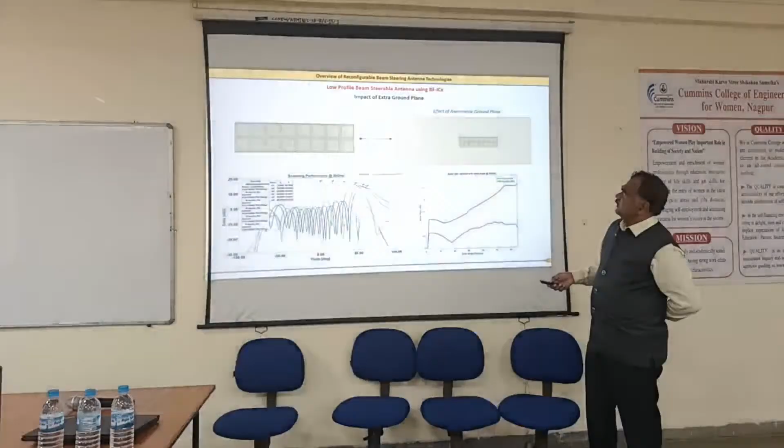Again, these are the similar hardware, same things. What are the different stages I am showing here?

We got the beam scan performance, different gain variation, beam scanning performance. We got good near field scanning. We do it in the planar near field so that we know how the aperture amplitude and phase distribution is plotted. These are the holograms using the measured near field pattern. Then we know where the problem is and how to attack it. Those things can be easily diagnosed.

These are now shown bigger. Now these are the bigger boards. Bigger boards are accordingly taken and they are fabricated now, which are being tested right now.

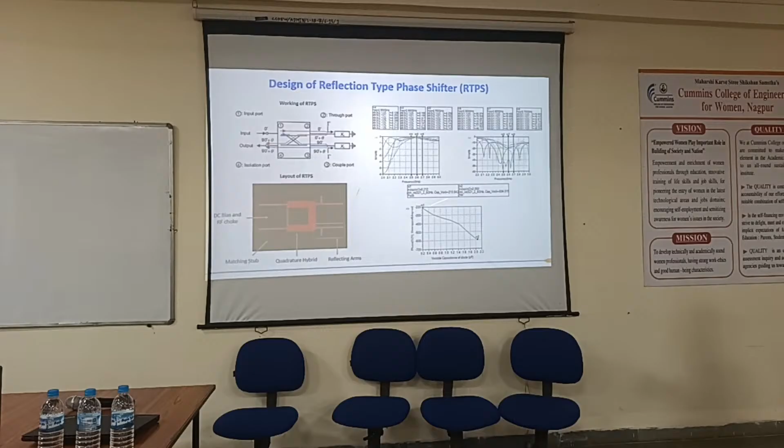The same thing was developed in a different full antenna using those reflection type phase shifters. Since it is S band and low cost was required, and MMICs are specifically not available to us in these bands, we made a low cost solution by designing our own reflection type phase shifter and made this antenna worthwhile.

Same development cycle, how these antenna architectures at various stages and their performance are shown here. What are the challenges we faced? How we developed it, those things are displayed.

Now, as I mentioned, digital beamforming is really the cutting edge, having various advantages. Here, the only problem is in the RF domain. If it is S band or something low frequency, we can directly digitize it. ADCs are available nowadays, ADCs are available up to Ku band, but they are too costly. Still, we are going for Ku band direct sampling. The problems are very large there also, when you sample at such a high frequency using these high-speed ADCs.

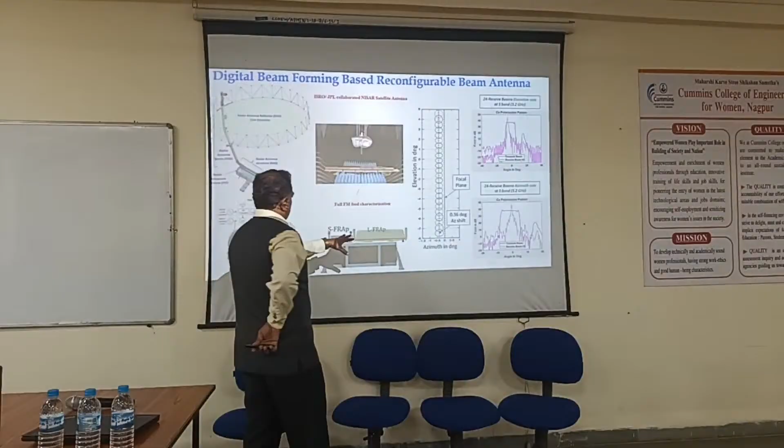Another application essentially required generating multiple spot beams, multiple shaped beams, and creating interference nulls in a particular direction. There we are achieving this using the DBF approach.

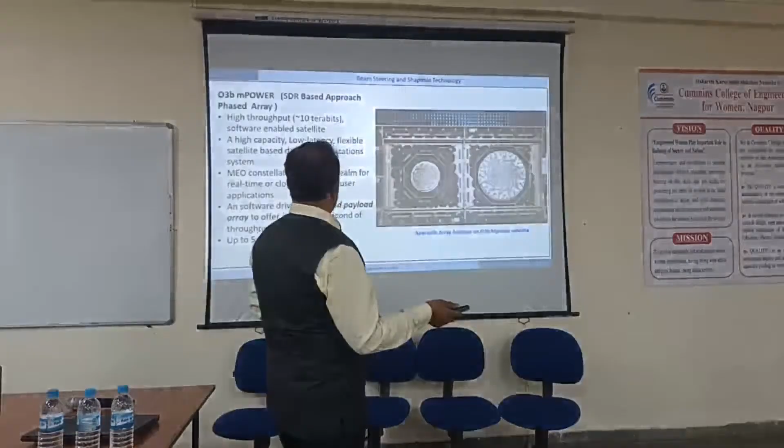Some worldwide scenarios show the best usage of this technology in the O3b mPOWER satellite. These are photographs of the O3b mPOWER satellite, showing the radiating arrays. If you see, they are aperiodic - not regularly placed, no regular arrays, completely aperiodically structured. Nearly 500 to 600 elements digitally, and they are able to generate even 4,000 beams simultaneously, independently scalable. This is the MEO satellite, and that's a really fantastic example of our technology.

This particular satellite is leading in this area. Another was Viasat, which had an 18-meter antenna at the level, but that satellite failed. It was launched by a US company and failed, so this one is still operational. The recently launched constellation is nearly complete, not fully complete, but this development of digital beamforming or SDR-based phased array approach is really the leading example of this technology.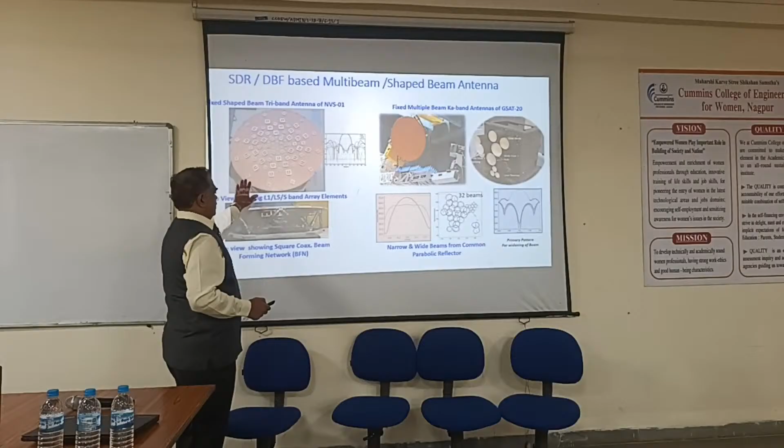Go next - some examples I have shown here are from our navigation satellite. This is not a steerable beam antenna; it's a fixed beam antenna having a square coax feeding network. The photograph is not here, but it's a completely complex feeding network. This is a tri-band satellite antenna, with patches generating circular polarization in different bands - L1, L5, and S band. Three bands are there, generating very good flat-top beams.

This is because navigation essentially requires effective EIRP power to be constant over the entire region. So it was an exact fixed beam feed network, so that it could generate a very flat-top beam at S band, with a mixing of the array.

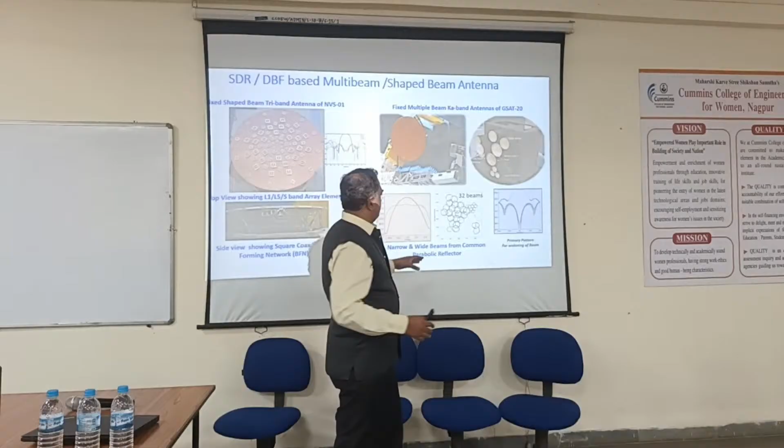Normally from a single aperture, if you get this kind of beam, conventionally I get a narrow beam spot beam. If I have the same aperture without shaping, how can I generate a wider beam to reduce the number of elements? We have to generate a primary pattern such that the secondary pattern becomes large. That's the concept we apply here.

We played with the concept of aperture theory. We put the illumination such that the field is sized where we can generate nulls and side lobes, illuminating this parabolic unshaped reflector. We could generate this kind of wide beam. This was also a novel idea. We applied it and flew it, and that has reduced the number of hardware on board and is serving a very good application.

This is one of the examples we are trying for the Chandrayaan-5 or LUPEX lander. Again, a very technological model. Conventionally, for the lander, we need altimeter information correctly, altitude information correctly. Here is the location on the lander, the altimeter, Ka-band altimeter antenna. Conventionally, we need this kind of four beams.

These kind of four beams, from the northern direction, three at 120 degrees apart and one northeast. Effectively, we need a four-slotted array antenna for this application. This size will become 400 by 360 mm for the entire Ka-band set.

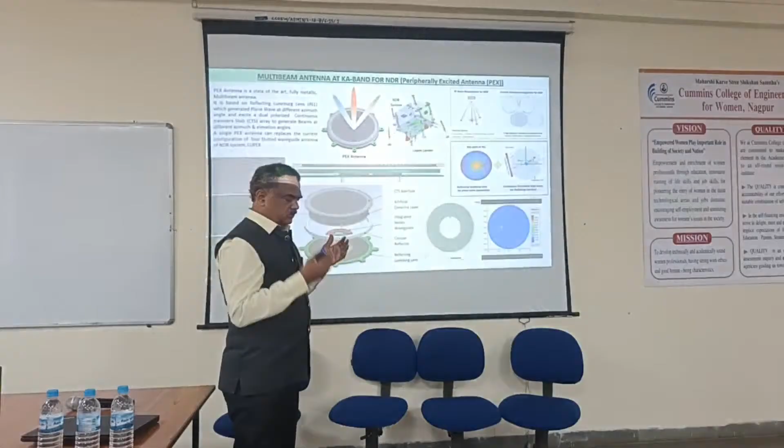But since this is for an interplanetary mission, the major challenge involved is to reduce the mass, reduce the power, reduce everything. So one of the technologies we are working on, which we have designed and loaded for fabrication, uses the concept of a peripherally excited antenna with reflecting Luneburg lenses and an artificial dielectric layer.

If you see here, sidewise, if you change it sequentially, we are able to steer the beam. Effectively, those kind of four beams are generated from a single antenna. So this kind of four antennas will be replaced by a single one. Size will be lesser, mass will be lesser, and it will serve the purpose. That's the technology we are working on.

The concept is based on a profiled structure. It appears uniform, but it is not. There are small pins, nearly 10,000 pins, in a small size of 200 mm. These kind of sharp, nail-type pins are required to be fabricated precisely. This structure is a continuous transverse stub.

This is also very challenging for fabrication, which will generate conceptually four beams, variable beams, and will replace the existing design. This is what we are developing. The design is over, and we are going for fabrication. The concept is based on basic optics or physics that we applied to the material domain, and this is how it looks from the side view. Very small, but it serves significantly for the planetary mission.

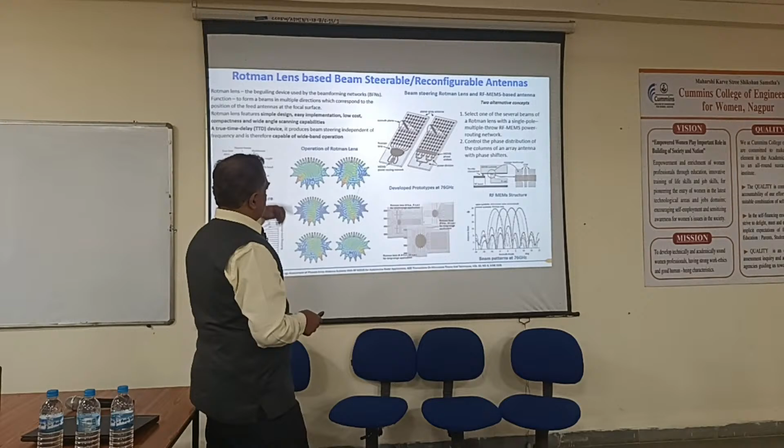Again, this is the concept of the Rotman lens. This is not ours, it was published long back for a different application, so I will not go into that. But we have applied something much more advanced than this for a very practical application.

Good concept. Right now we will not go into that. Another is the

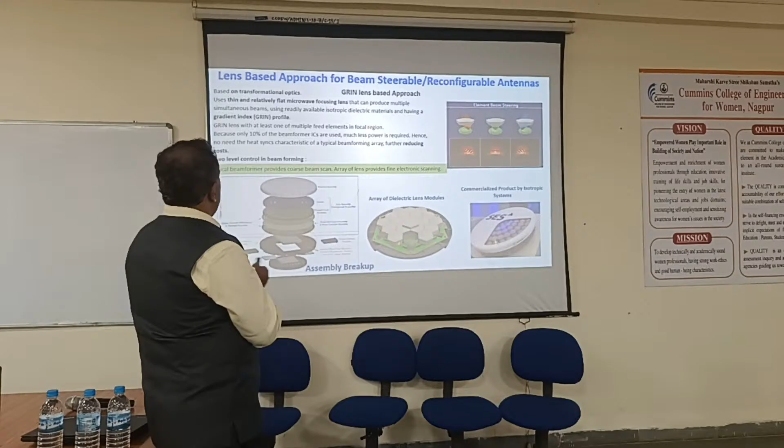Domain of the lens as well as the electronic scanning, gradient index lens and transformational optics. This is the field where transformational optics is being used. Basically, microwave is nothing but derived from the physics of optics, and the concept can be applied. If you have a good physics and optics concept, then you can apply it to the extent of microwave antennas or microwave field.

This is an excellent piece of work, the Isotropic company has developed this for a similar application, ground-based application. I'm not going into the detail right now.

This is another area of research essentially required. Still, a lot of work is required to be done on this domain, the directional modulation technique. Note that this is not only the aperture plane, it's now the concept of modulation you apply to steer the beam.

That concept is still in the working stage, creating interest in various researchers for how we can use it. It will be very good for terrestrial communication and a lot of applications. If this goes through, then hardware cost again will come down significantly.

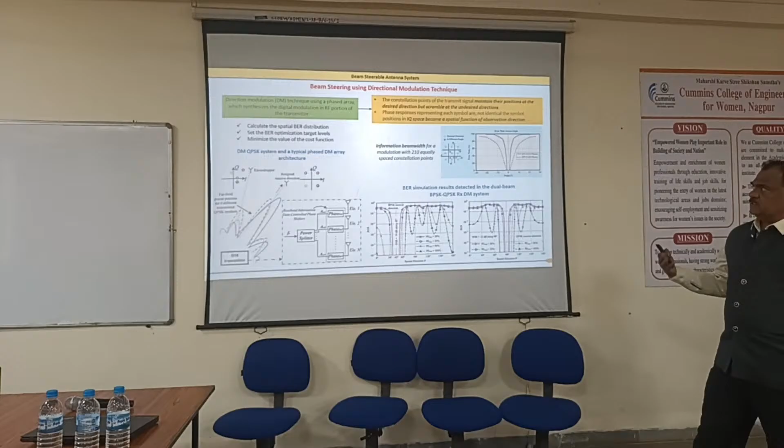The similar concept - what will happen is instead of the conventional like this, it will become like this. This will generate directional modulation using RF switches. Shown here conceptually, but there are various ways of achieving this approach differently.

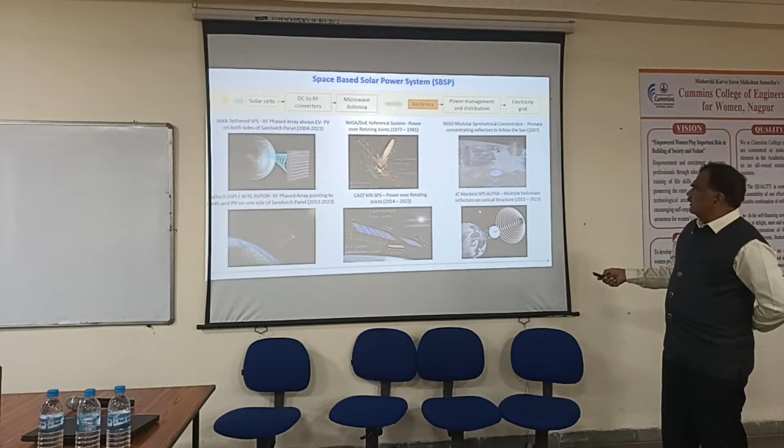Various concepts are floated by different space agencies. Ours is still in infancy, I would say, because the funds required are enormous, so we have picked a slightly lower base and done some work. There is a decadal plan, decadal development, probably because in Bharat we may build this in some time. That's the timeline.

This is just one of the photographs I mentioned, showing a beautiful concept of onboard satellites capturing power. So we don't really essentially need moving parts for this. This is the NASA concept I'm showing, just to give a thought for your mind on different approaches.

Capturing power and getting it automatically all the time, so that the satellite will be pointing towards the sun, you won't need to physically rotate anything and will still get power. There's a retrodirective antenna concept here as well, so that from whichever direction the signal comes, power goes back in that same direction, without using any phase shifter or anything. These concepts are applied, and this is the solar base.

The project is called Cassiopeia, Constant Aperture Solid State Integrated Orbital Phased Array. Since our topic was phased array advances, these are the advances of phased arrays. It's still under development, but it will see the light of day in orbit. There are a lot of ways of doing it. The technologies are different, but how you apply the concept and execute it is what makes newer technologies emerge.

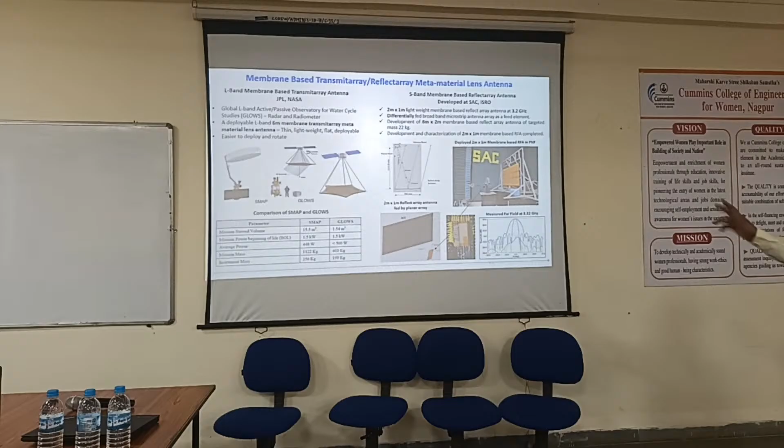I have a question, sir. So what exactly is this software defined radio, and how is it different from hardware defined radio? What are the applications of it, and what software is used to design software defined radio? And lastly, do we need a physical antenna for the transmission of the software defined radio signal?

Yes, let me go back, I have shown you two examples. Go back, please close this presentation.

Software defined radio is another name for the digital beamforming based approaches. Why is it called software? Because by changing the software or changing the excitation coefficient through command line in the software, I can steer the beam, shape the beam, change the direction of whatever required. So that is the part why the software is able to control the entire thing.

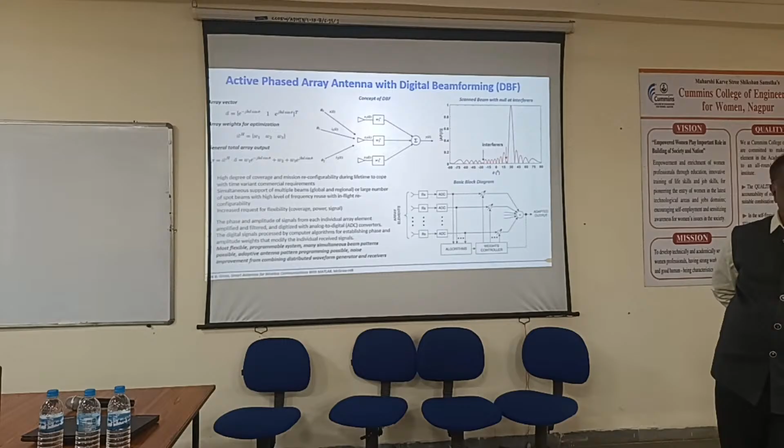Because all this power is sampled into your digital domain. Then simply by processing it, you can generate it. Even you can do it in later processing also. There is already quite a lot of intelligence - in space flight applications, there are satellites called electronic intelligence satellites. They simply move and gather data. They don't need to transmit, they only need to gather intelligence. It's an array, wide frequency band.

Hardware is essential for working over this band. Once it's gathered, it gets converted into digital. Let's say this RX, whatever you have received, sampled by ADC, whatever band, this can be down converted till the ADC supports whatever high speed is needed. Once down converted into the ADC, they are stored into a single FPGA board which will be able to do it. This FPGA software tool can now.

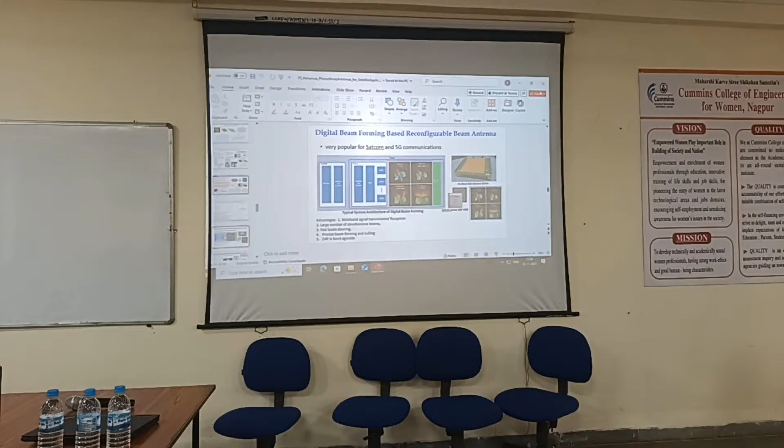You will have a dielectric substrate, or even FR4, which is probably available everywhere in academics. If you need to design it, the structure - the meta element design - is just a printed structure, as I showed in one of the previous examples.

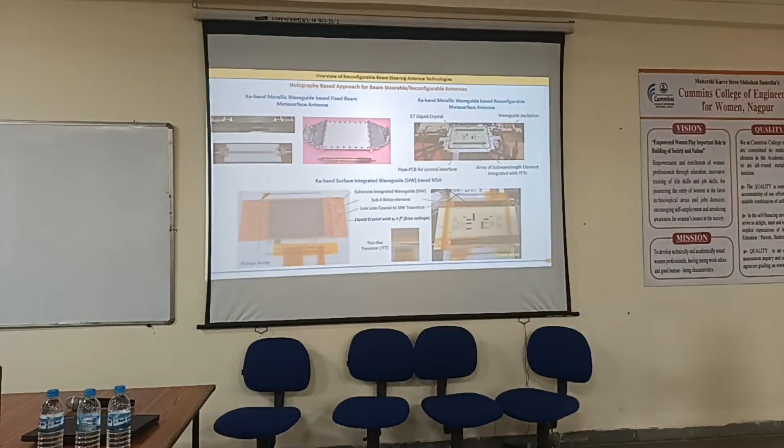This is the complementary electric resonance, you can have SRR, different types of this, and it is very much doable by academics, realizable. Also there is no fabrication difficulty, the material point of view is also no problem, the design problem is it's your own idea. Tools are available, papers are available, you can use it. So metamaterial is not something people many times have misconception about, that it's a different material having negative mu or negative epsilon, or the combination.